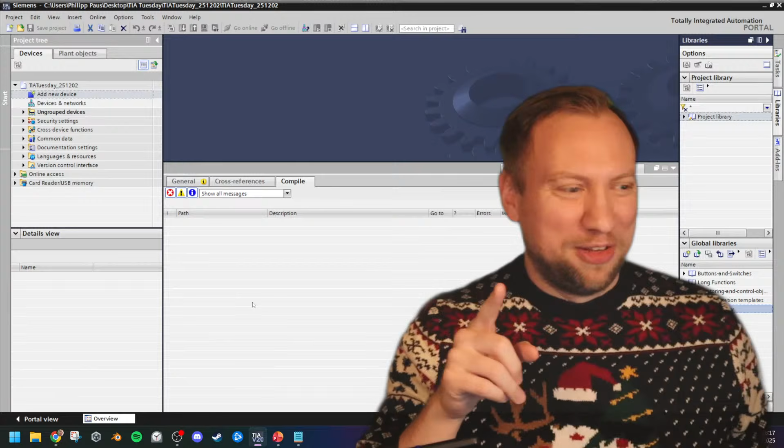Okay, let's create today's project, and I also want to get into something I completely forgot. Last week I created the library TIA Tuesday that I want to publish, and I have not published it anywhere yet. What I will do today is, whatever we create here in our project, I am going to push into the same library, and I'm going to publish this library somewhere. I will make a post and let you know where that is. I have not forgotten, I have just not done it.

So questions there, Mr. Goodman: am I planning to talk about OT cybersecurity or OT IT integration? Cybersecurity, I'm not too good with the topic. It is an important topic, and it's very important that you don't make any errors there, so I don't feel too comfortable talking about it too much. I will put it on the list here in the communication: IT, OT, security. Definitely important, but I'm not an expert in everything. No one can be.

Anthony has a question there. Hey, Ateko, hi. Hey, Kamal, hi. YouTube channel helped a lot with learning. Yes, that's why I have the YouTube channel. Happy to read it every time.

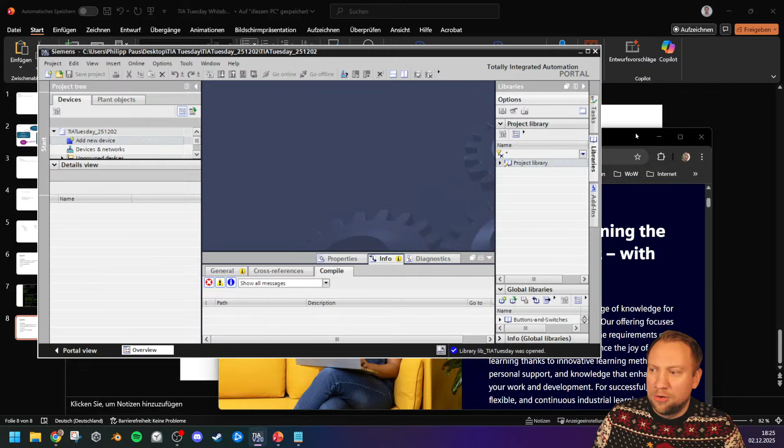Servio, maybe I'm late to the party. What about Factory IO? You've seen me use it, yes. The reason I'm not going to use it today is because I have not gotten a license. I will in the future, but right now I don't need one. So the trial license has gone out the window. Will that work for simulating drives? No. Factory IO does not have drives integration. It's just like a 3D mechatronic system. It's not technical components, it pretends to be, on a very superficial level.

Which tool do you use to restore an SMC card? I'd say TIA Portal, but if it's gone, it's gone, pretty much. Have I ever used IBA? Nope. I have drunk a lot of IPA in the past, India Pale Ale. But IBA, I have not used that. I don't know what it is. Sorry.

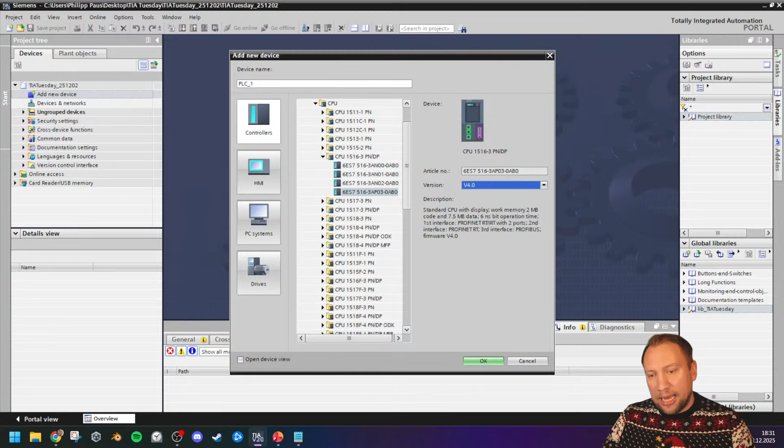So, right, I now chose a TIA controller here, a controller that is firmware version 4.0. Now, in the past, the user control and the access control to PLCs has changed quite a bit. And of course, I have not really talked about the newest version, except for me complaining that there is a new version and that the new version sucks and I hate it. Now I want to take like 5 minutes to talk about it.

I will not look at different YouTube channels right now, but maybe I'll put it on my list. My T-shirt is like my Christmas sweater, my ugly Christmas sweater.

Yeah, so this one here. Firmware version 4.0 is the newest firmware version as far as I'm concerned. Maybe 4.1 or so, but that's the most recent one, and I will call this PLC drive. It's version 4.0. Now, when we nowadays set up a PLC project, there will be this pop-up. This pop-up is nothing new, but what we get in this pop-up is new. And it talks a lot about the user management and the access level to TIA Portal.

Yeah, but Arteco, you're right. If you are running a successful firmware version, try to upgrade it if you know what you're doing. If you don't know what you're doing, don't upgrade it. Never change the running system. Unfortunately, firmware upgrades have to do with safety. And industrial data and your systems should be protected as much as possible. So a firmware update is sometimes crucial, as unfortunate as it is.

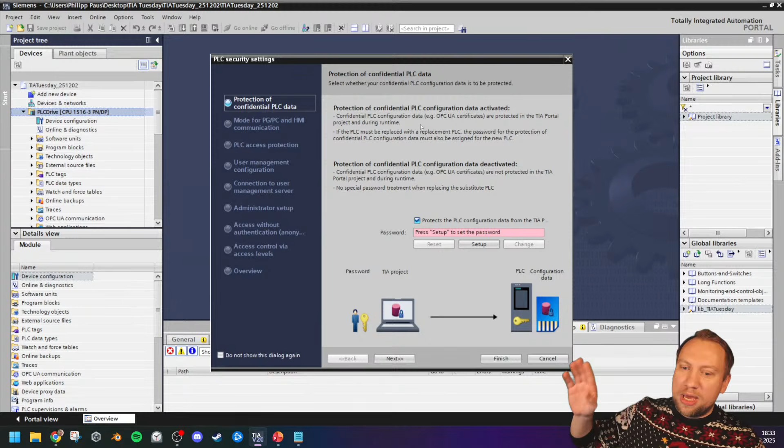Okay, most of this is not too important here. I will turn off the PLC protection. We still, however, have to have this. This is the new thing. You can disable access control, but this, of course, lowers safety and so on. This is not what we want to do. We want to enable access control. And this is the new user management that we have.

This new user management is different from what we had. In the past, everyone could program your PLC except for the ones that you set specifically in the PLC hardware and device configuration. So you had to create the PLC user in the device configuration. That has changed. Now the users will be saved inside of the PLC. However, they have to be set up globally inside of the project. They can be in the project itself, or they can be on a server and be synchronized with the server, which I will not set up now. But we have this stuff here.

Yes, the firmware update will change signatures. Unfortunately, yes. Rebuilding is not great, but sometimes it is necessary. And Jason is right. Not talking too much about firmware now, but of course, if you have a running system, don't change it.

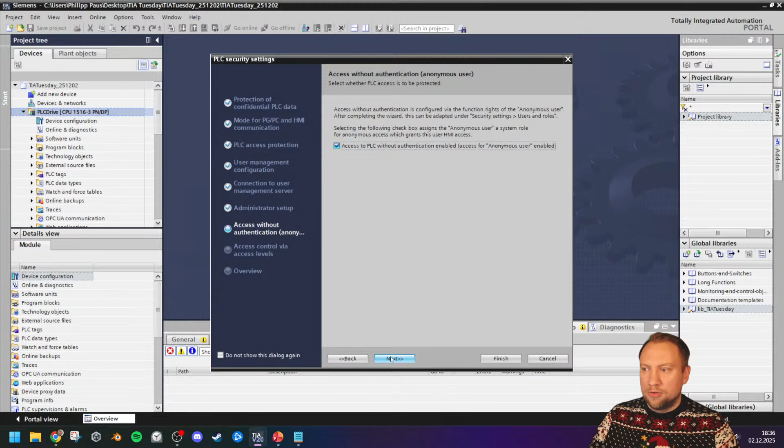It's kind of stupid, but you have to go through this process here. And you see now, I cannot change the access level here. There's nothing I can change because the access level is now fixed on a global scale.

We have told it, hey, yes, the anonymous user is allowed to do stuff, but that's it. Right? If we don't do this here, we have to create a user. There we go. That's just the new process. There is now still one thing that won't work, and we will see this in a second here.

If I now try to compile my program, that should probably be without. No, that is already with the problem. Yes. You see, if I compile my program now, my PLC, it will give me an error. Whoops, I cannot download. I clicked the wrong button. But while this is loading, I can now read questions and so on.

Hey Ben, hey go. Would you ever consider doing code reviews? I don't really do code reviews. Sorry. It would be maybe on TIA Tuesday. Maybe I can do live code reviews. Oh, that would be something interesting. But I also am not confident enough that I should do it currently. Yeah. For students, for beginners' projects, yes, but for real industrial projects, could be quite difficult. There's still the drives and firmware discussion there. Hey, Artux, hi. How are you doing?

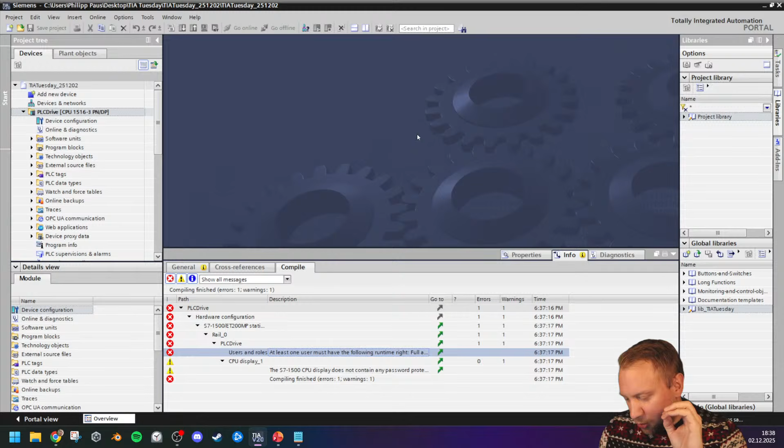Performance differences between languages. CRC error. There's a good question, so I will interrupt what I'm doing here for a second. So I put a pause on this, that we have a compile error now. Right? CRC error asks if there's performance differences between languages. Generally no, but generally yes, depending on what you want to achieve. If you have a function block diagram or ladder diagram and you basically create the same program, they have the same performance. That's it, right? Those are designed to do the same thing.

Now, if you use S7 Graph, that has a different purpose. So you cannot compare two things that have different purposes. You can create the same behavior in the end, but of course, if you have a sequential program, Graph will always be more fitting, more performant than whatever other language you create the thing in, right? Because it has this purpose. Yeah, timing and space. Of course, that's what I mean. That is what performance is in the end. So you want to choose the correct language for the correct job.

Now, the only languages that have the same purpose nowadays are ladder diagram and function block diagram. And those have the same performance. The other two languages that you want to look at are SCL. SCL is this coding language, which is a different thing than function block diagram and ladder diagram. So for more complex algorithms, that's what you choose. And then you have Graph, which is also a different thing, for sequential things. Theoretically, you also have STL, statement list, but that is out of the standard. When it comes to performance nowadays, it's the worst, STL.

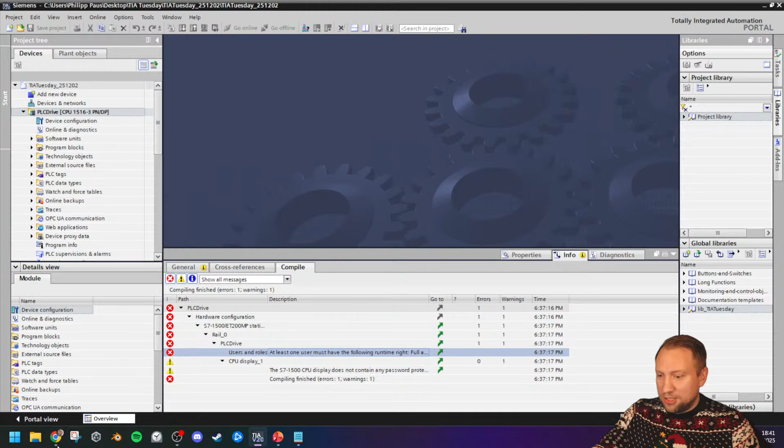There we go. Enough. STL is dead. Yes. Assembly language is literally slower, Jason. Yes. STL is dead. 1 second. What's the programming standard? I always mix it up.

No. What's the PLC programming standard? I forgot the number. How could I? 61131. Yeah, this one. Sorry, I had to Google it on the side.

So the official programming standard, the international one for PLCs, states the programming languages, and structured text is still in there, right? Here, instruction list is a low-level assembly, like STL. Instruction list is this low-level thing, but that is out of the standard. If we use this, right, look at this instruction list. This is my favorite language that is on Wikipedia. Right? STL, instruction list. AWL, that's STL in German, is no longer included, is no longer part of any standard.

STL is dead, right? You are using it on older hardware, you don't use it on newer hardware. STL and pointers are dead. Tant Costco, that's exactly what I'm talking about. We don't use those anymore. It's not me saying it, it's the standard. I just say what the standard says.

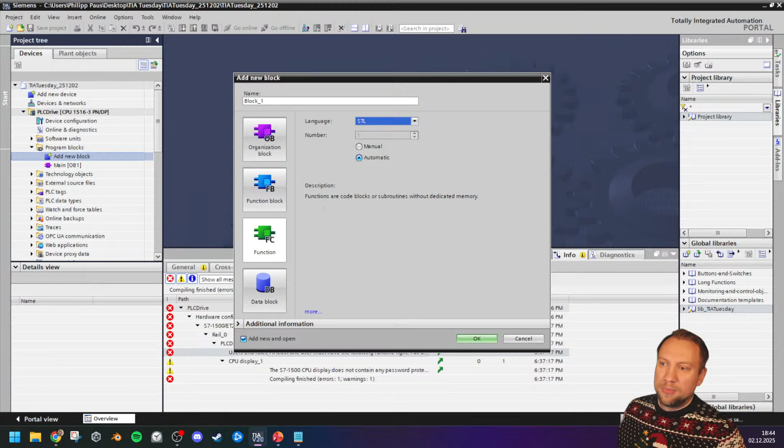If you create STL code in your Siemens PLC here, right? If you create a block and you make it STL, this block will be the least efficient block that you could write. Literally, because the hardware does not have the necessary registers anymore. It literally is the worst. S7 1500s. 1200s can't speak it at all. 300s, it's still the best.

Cancelled. Rakesh, that's the problem with me. Yeah, there we go. So users, right? I have created the PLC, and now when I compile, it actually does not allow me to compile anything because no one has full access, right? So I have to create a user here that has full access. I just double click on this, and this is now the settings for the complete project. So if I have 10 different PLCs, they all use the same user here.

And the anonymous user, or any user that I could create now, has to have the PLC administrator active. Right? This user role, the PLC administrator role, has to be activated for at least one user, which is here in the security settings in the users and roles. That's where I am currently. So this is a setting that when you're using a version 4.0 and newer PLC, this has to be active.

Usually you would, of course, create a new user, local user, give that user a password, and this would be your PLC administrator. And then your PLC would be password protected, right? But I will have no password protection, anonymous. Everyone can override my program. Artico, your first PLC stop in production was due to a loop in STL. Yes, one reason why we don't do it.

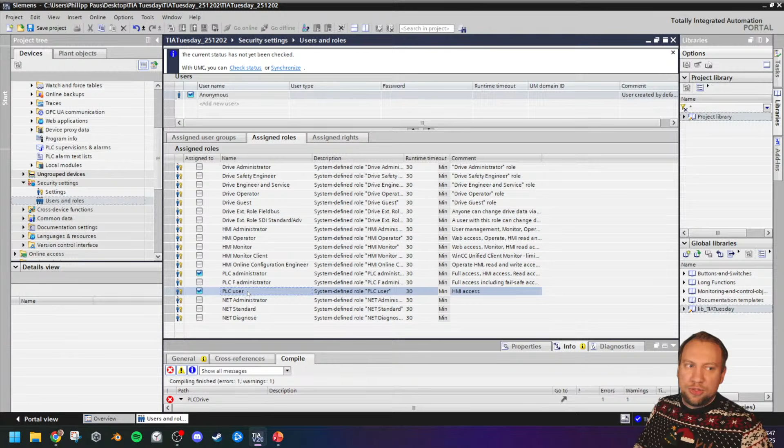That sounds like a lot of work, but that is how TIA does it now, right? So in the future, you will always have to go through that, users and roles, and then the anonymous or any other user has to have the access rights here. And this is the least access rights that you need for PLC programming. Yeah. I could now actually also deactivate the PLC user because the PLC user is included in the PLC administrator, but I will not. There we go. And now if I compile, everything's fine again.

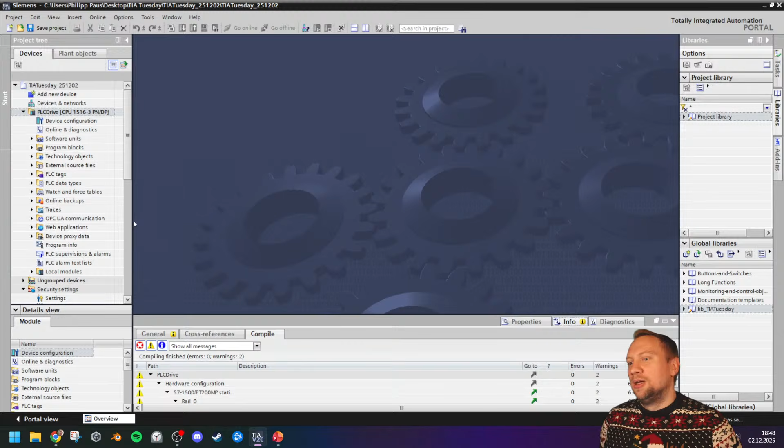Now, we do have our PLC, and I want to simulate it very quick. Right, simulation. I turn my simulation on there. I will disable. No, this is the standard stuff. We've had this. There we go. So I do not have the PLCSIM Advanced license anymore, so I have to use the PLCSIM Soft Bus, which is okay right now because I'm not communicating to any other devices. In the future, I do have to get the Advanced license, though.

Yeah. And now I can download. And now every time that I download to this PLC simulation, the anonymous user can be used and will be used. Right? We have set this up. The anonymous user can access the PLC without any password access. That's what we have set up.

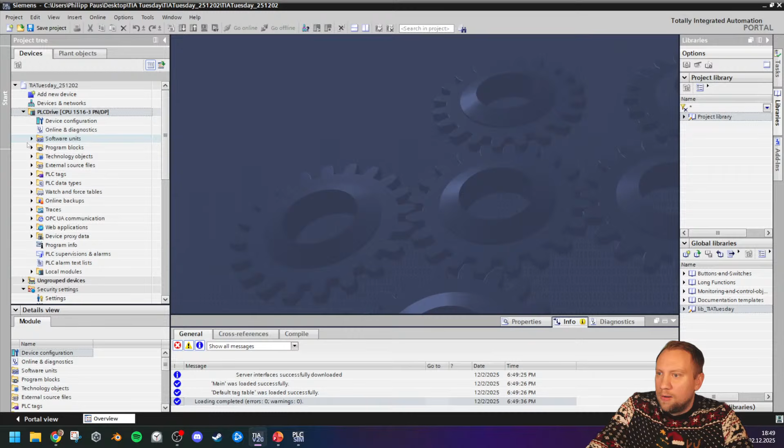That's too much caps. Is SODT timer retentive? Abhishek asks if the SODT timer is retentive or not. You can turn on the timer to be retentive or not. Very quick, just to answer Abhishek's question. By default, they are not retentive. Oh, the SODT. Is that the old one? Oh, the SODT, I have no idea. Don't use it. That's in the legacy branch there. Those are hardware timers. I think they are not retentive because hardware timers, they cannot go into the...

I could be wrong on this, but if I look at my PLC, at my assignment list here, you see you have inputs, outputs, you have bit memory. This bit memory has one big area that is retentive and one big area that is not retentive. And then you have the timers and counters right on there. I want to say I don't think they can be retentive. They can be retentive. Here, look at this. If you click here, retain data, you can say how many timers starting at timer 0 should be retentive.

So your manager is old. The SODT stuff is S5 timers, S5 counters. That's very old stuff. You can still use it, but it's hardware stuff. Now, I don't want to get back into efficiency when it comes to programming. The Siemens PLC, the S7-1500 especially, has hardware for this, which is kind of stupid, but that's what it is. There we go. But you can make them retentive.

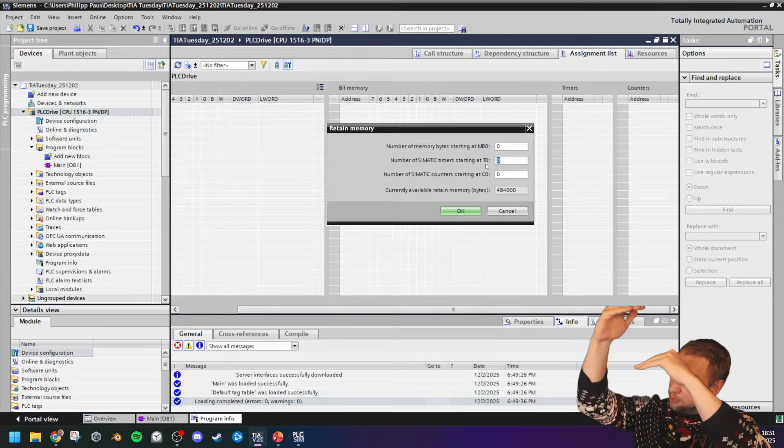But this will always start at timer 0, right? So if you only want timer 5 to be retentive, that is not possible. You can only have timer 0, 1, 2, 3, 4, 5 retentive. No gaps in between, right? It always starts at T0.

Hey Dora, hey. Those things are older than me. S5. Come on, S5 is S5. It's got to be older than me. 1 second. Siemens S5, Step 5, is older than me. I think so. Ha! It's older than me, yes.

The retain settings are the stop-start thing. So, yeah, it will retain the state after stopping and starting. What is the first S? It didn't exist. Siemens made Step 3, Step 5, and Step 7. Don't ask me why. I read into it and I forgot about it. It is S3, S5, S7, yeah.

Okay, so good. Now, user management done. Let's get into drives a little bit. We're still good on time, right? I've not been stalling. I'm not an expert in drives. That's what we will find out very soon. But what I want to do is in my program here, my PLC itself. Hey, Rodrigo. Hi. You're welcome.

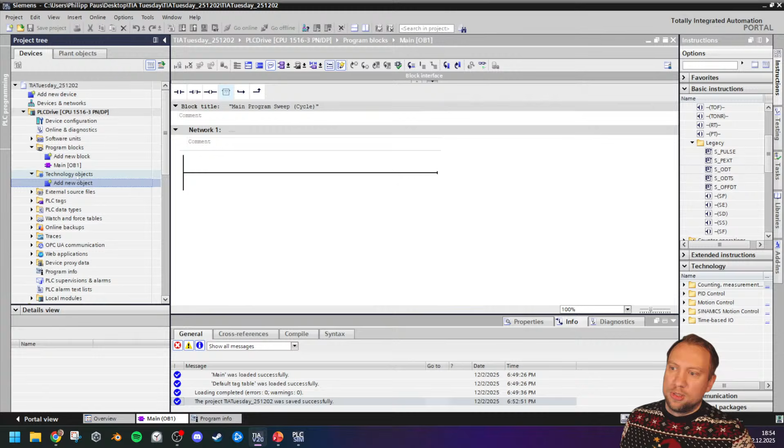So you will have to integrate more consistent timing things, which will happen automatically. So what we want to integrate is a so-called technology object here. Now, drives. And you will see a better picture soon that TIA has integrated. But basically, the perspective that I have is I live inside of my magical bubble. That is the PLC.

Now, my magical bubble, the PLC here, will control a huge mechatronic system. I'm kind of the manager. And there are many, many subsystems inside of a mechatronics system. Now, one of those subsystems is, for example, a conveyor belt or a lift system, whatever we have. Anything that needs to be driven. This system of course has inputs and outputs to our PLC, so there is some communication.

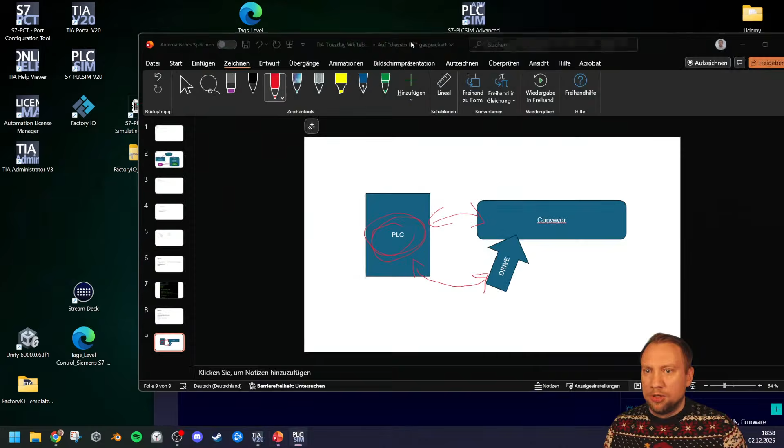Version control and documentation features. I mean, that's a pretty base level feature, but I will put it on my document here, which I've closed. Why would I ever close my document? One second. Yeah, so that's the thing. So we will concentrate on the PLC side of things here. Just one second, I want to have my document open so I can take notes. For whatever reason, I have closed it. TIA Tuesday. I'm one of those people that if I don't need a folder, if I don't need a tab, I usually close it. Yeah, there we go. Video communication. RS485. I will probably not touch RS485 for now.

Good, okay. So what I need to do though is this outside component, this drive, is very complex. Very, very complex. Those drives can have hundreds, sometimes reaching into the 1,000 different parameters. They have a crazy amount of variables, a crazy amount of intelligence going on in themselves. And I don't need to touch this.

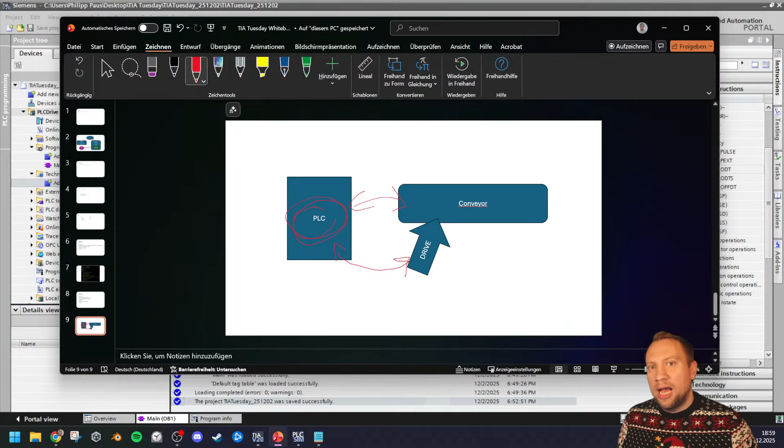From my perspective, from the PLC, what I will do now is create a technology object. Now, a technology object: there's different types, and I've already talked about technology objects a little bit. I will now use the one that I'm most familiar with, a speed axis here. Now, a speed axis.

You see, the speed axis technology object maps a physical drive in the controller. I can issue commands for default speed with a drive with PLCopen motion control instructions. Now, PLCopen is a standard that is not Siemens. So I could, with this, connect and control an external drive that is not just Siemens, but any other device.

Of course, if you stay in the Siemens world, it's much nicer, but yeah. Now, one thing that I have already said is that the drive itself, the communication to it, is very time critical. And you will see the use of technology objects affects the temporal behavior of other CPU execution levels, including the F program. This is extremely critical.

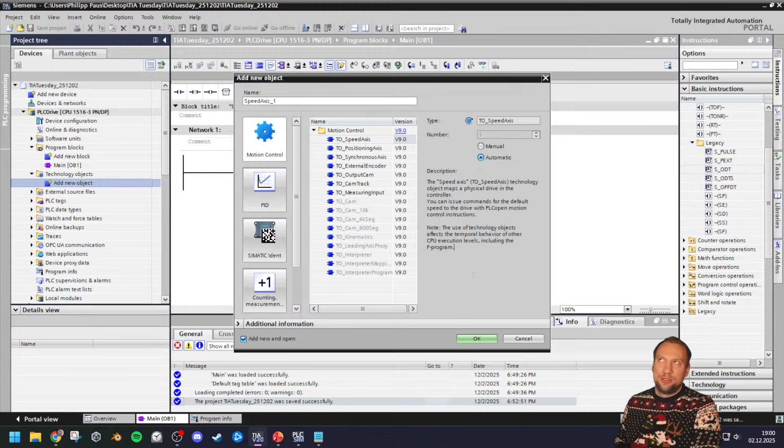The drive itself, we will not have a complete drive inside of our PLC. We have assisting things to control it, but we will not replace the whole drive itself. That will be very critical. It already is going to slow down our PLC tremendously. Right? So if I add the speed axis here, I will not give it a nice name. That is a nice name, and I'll hit OK.

What you will see is that the PLC is going to create subroutines automatically. You have a motion control interpolator and a motion control servo. Now those, right? I can't go in there. They are know-how protected, but they are for all of the things that the controller needs in order to communicate with the drive. Right? Many things are in there.

And now, can I still go online? I want to do one thing. Yeah, I can. I have not talked about interrupt priority. I probably did, but let me actually get in there. Portal features. Interrupt priorities. This, of course, leads into that topic. Yes, 100%. So right now, Speed Axis 1. Yes, I will not rename that.

That's fine. You see right now, my PLC program takes approximately nothing, right? Every millisecond, the program just runs. That's the green number that we see there. The green number is how fast is our PLC. And therefore I will need to make one click here. Now, if I download my PLC, I think that it will now have a temporal, I'm not sure. I've actually never checked this out, but it should have an effect on our cycle time already.

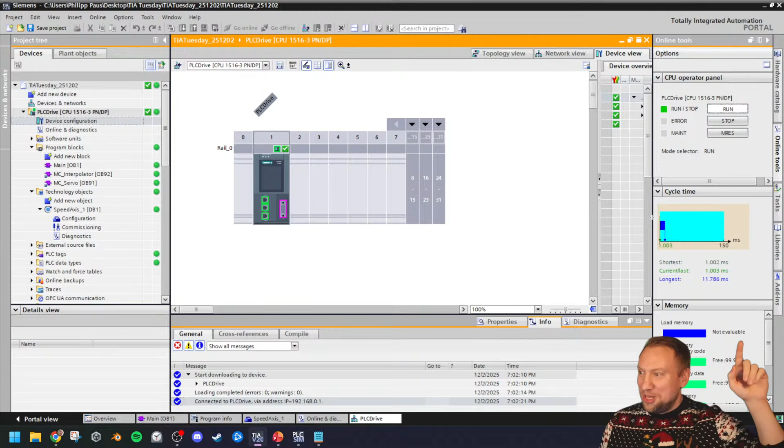So if I go online, maybe not. Nah, we can't really see it. We can't really see it, but if it would be a little bit more complex, we could already have an impact on the cycle time. I mean, we can see it a little bit. It's 0.003 milliseconds more, 0.001 milliseconds, but it is longer.

It is. Right? Will I make a video about ASI bus? I have it on my list. ASI is definitely on the list.

There we go. So this is now for our motion controller. Now, one thing that I want to do already is I like to visualize things, right? And I want to have you visualize right now a conveyor belt. So you are running a conveyor belt, and on the conveyor belt you have boxes. You have stuff that is very, very critical, that is not allowed to break.

Right? After 4 years, hey Kumar, hi. I've been back for, I think this is TIA Tuesday number 6. I think it's 1.5 months now.

Yeah. So what I want you to imagine is that. So what I will do now, and I've done that a couple of times by now, is I will take my speed axis and I will trace some parameters that I want to trace right now. So I will go here into my traces. I will add a new trace. This is very fantastic what we can do with the speed axis here.

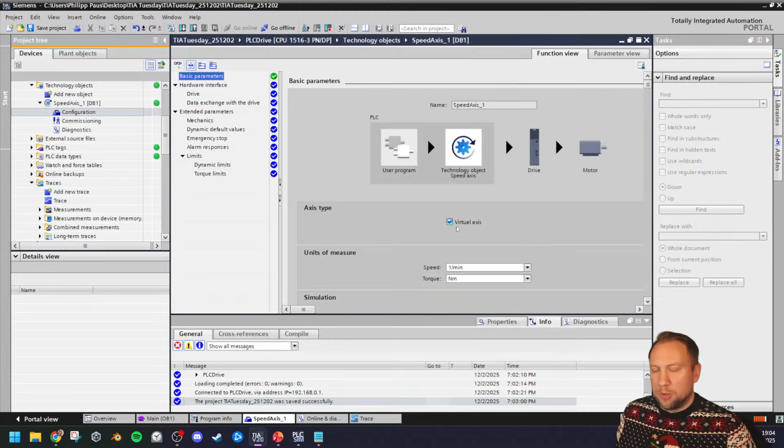And by the way, for my speed axis, I have changed one parameter that is called virtual axis. Now, this virtual axis parameter is important right now for what we're doing. It tells me that there is no physical drive that we want to control right now. You see, if I don't have that, I will need a physical drive, but right now I don't want to. So the PLC itself is going to make a lot of decisions here.

So in my trace, I can select my speed axis, and you see when I select my speed axis, only one click, on the bottom here in the details view, we actually have a lot of parameters that I want to talk about. Of course, let's talk about the velocity. Let's talk about the acceleration of our conveyor belt, and let's talk about the velocity and the actual speed.

No, the set point. The set point I want as well. And then I want to reorganize this a little bit. Here we go. Now, I will re-download everything because this needs to be in the controller.

Oh, I didn't need to write the thing here. That doesn't matter. Now, what I will also... This is new for me. Record events of technology objects. This function allows you to record a motion controller. This is interesting, but I've never seen that, so I will not touch it right now.

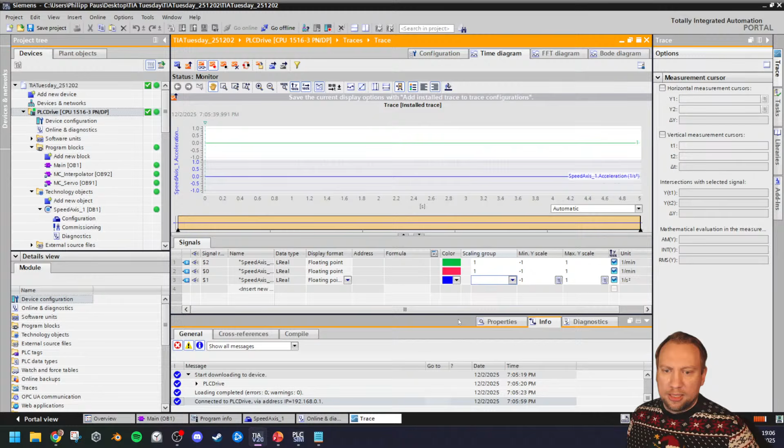This is exactly what I've done the last weeks as well. I do love traces. Tracing is fantastic. So right now, everything is 0. Everything there is 0. That's perfectly fine. And what I want to do is the following. I will have to split the editor window for this, so we still have the trace here. On the other side, I want to have... Yeah, I was wondering. It must be a version 20 thing.

I've never seen that. What I want to do is go into the commissioning of my speed axis. Now, normally in your PLC program, you just have an output for a motor that turns it on or off. Right now, what our PLC has control over through the technology object here on the right side is a lot of drive parameters. Things that we can tell the drive, hey, please do many things. And actually there is a lot of things going on.

I won't go too much in detail, but the first thing here is I activated the master control. This will be connected to a G120. So Nova asks, what about G120? This is what you connect to the G120. I'll get to that in a second. The master control here. There's usually 4 different areas that can have the master control. The drive itself: if the drive has the master control, you can use the operator panel on the drive.

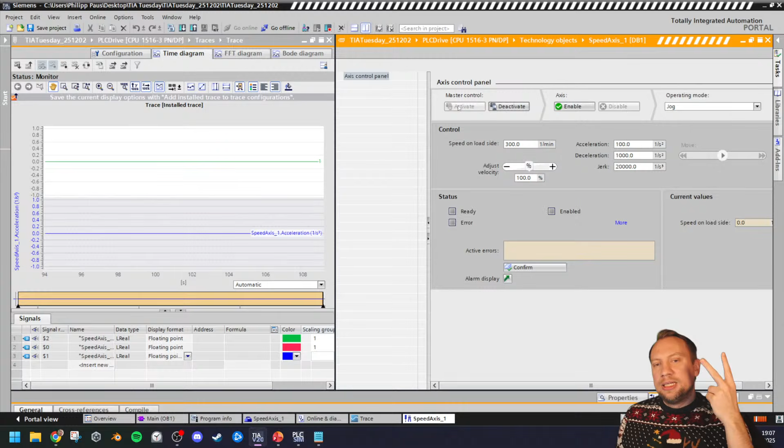The second is your PLC program can have the master control. The third is you can have the master control through any kind of interface. And the fourth is the commissioning window here. So I have activated master control right now in the commissioning window, meaning I am the boss right now. I can control, not the drive, but the technology object, which will connect to the drive.

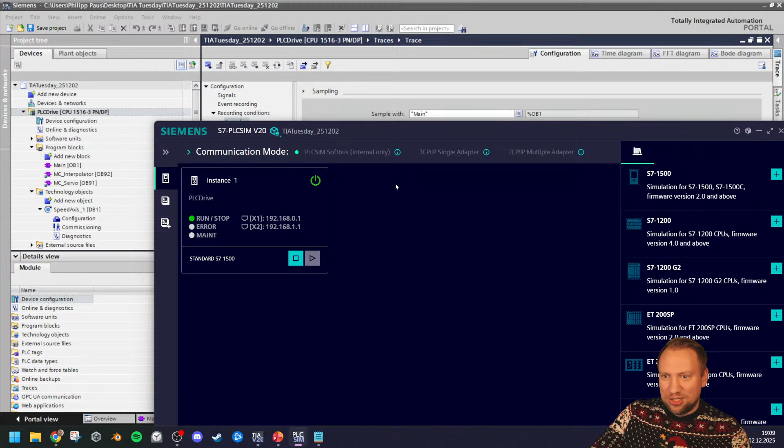The second thing is we have axis. If I click on enable here, there is an internal error. What? That is new. Exactly why? I have tested this, and I'm pretty sure it should work. Master control. Yes. Enable all axes. Interesting. Oh, screw you. That's new. Just 1 second. I have tested it with PLC Sim, yes. I have tested all of this, so it definitely works. I don't know why it does not right now.

So this, by the way, is just safety because the drive is very dangerous. Internal, I do love it. So this happens to me as well. Internal error. Like, what is the error? Please, TIA Portal, let me know what the error is. It doesn't. So what do we do if it doesn't give you the error? There is a commissioning tool, Nova. I will get into it in a second. This is an internal error, and I literally don't know what it is. So I will have to restart my PLC Sim and TIA Portal.

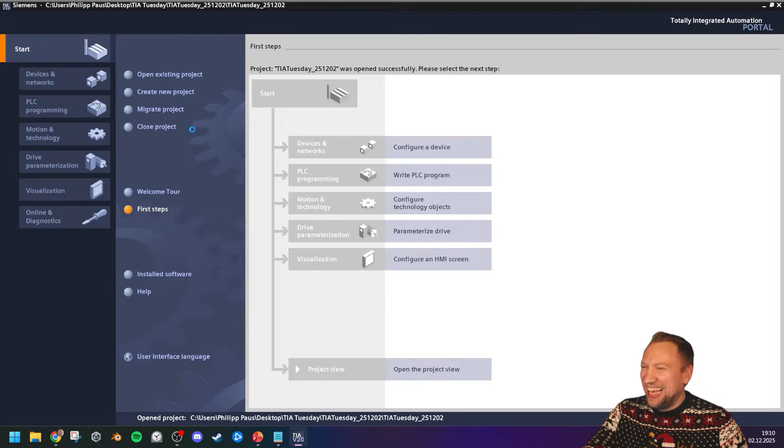Which should take only a second. Should work now, hopefully. No, I don't need to set up anything. I'm very sure. I will simulate this. Yes, we'll disable other interfaces. Usually it says restart the PLC or so. The main problem is that I'm doing simulation stuff, so it might have to do with the simulation, and it might also have to do with the user settings. But I have tested this early on, so it shouldn't.

Just give it a second. Could always be, right? That's also something we can learn here. Never freak out. Stuff like this happens sometimes randomly. It shouldn't, but can always be the case. So let me go into my TO, into my speed axis here, into my commissioning, and I should hopefully be able to start this now. If not, then this is going to break everything, and it's pretty bad because I can't continue from this point.

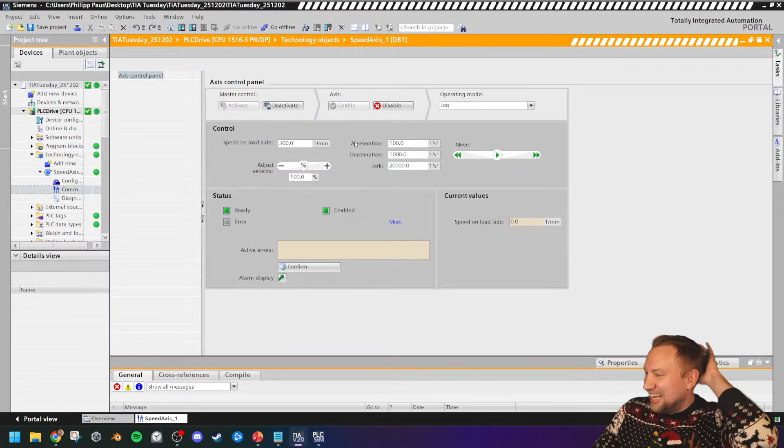Activate? Yes. This tells my PLC I will be the master of these controls. And now the enable. I could enable. Okay. I don't know why. I had to restart. Could be. Yeah, never freak out. Of course, in industry, you're always under time pressure, but try not to freak out. So this is okay. And now I want to go back to my trace as well.

Now, the problem is if I open the trace, this might press emergency stop if I'm not fast enough. Ah, it did. Master control is returned due to violation of monitoring time. Right? Once we close this window here, that tells the PLC, danger, the one that is having control over your drive system right now isn't there. So that's why closing this window or having another tab over it is dangerous. Now this works. I should have just had that as a parallel tab there anyway.

And now, I don't know why everything is scaled funky now. Why is that the case? Okay, almost there. Scaling group 1, scaling group 1. Yes, please go in the same scaling group. And this is monitoring. And now I can enable my axis here. And now I can control the motor, right? Motor on, motor off, drive on, drive off. Like this would be the speed, right?

Huh? Oh yeah, that's my set point. The real velocity right now is following 100% because the acceleration is extremely fast. No. That doesn't matter. It's okay. But we have a lot of parameters that we can use to change the machine's behavior here. Let's actually slow down the acceleration and deceleration a little bit. And that should now make it so that we can get a nice ramp, right?

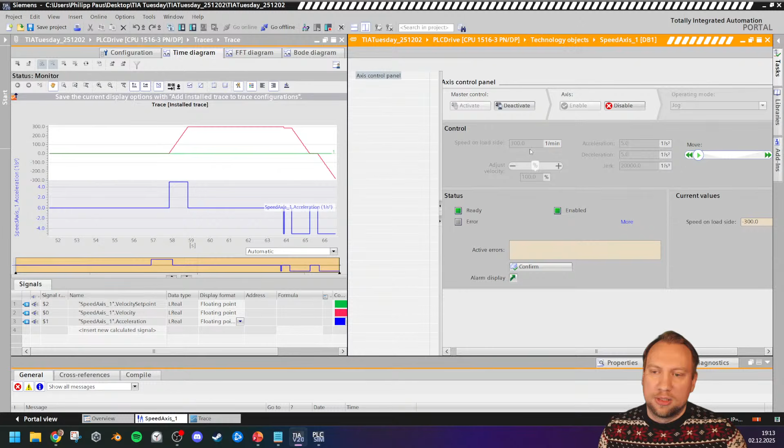The red behavior is now what the motor will give us, or what the conveyor will be. It will not just be on or off. We can, of course, control the acceleration and deceleration there. And if I have it very fast, it's just like a one-step thing. So we have those base parameters. Now, hidden in those base parameters are already hundreds of things from my perspective. This is magic, right? Now, the red lines, those would usually be created inside of the drive itself. But we're taking this job right now. The PLC, the technology object, takes this job.

Let me just see there. No, Emil, thank you for the hint with the TO version of 4.0. It should all work. I made it work just by turning it off and on. Yeah, there we go.

Now there's more parameters. Let's have a nicer curve by also changing the jerk here. If you don't know what the jerk is, neither do I. Of course I do, but we will now have this much nicer curve behavior. This is what you want to have your motor be doing, right? And now we went from this on-off in your motor that we had. If I go back to the base parameters here, which was something like this, this is just on-off. Very bad. Oh, also this.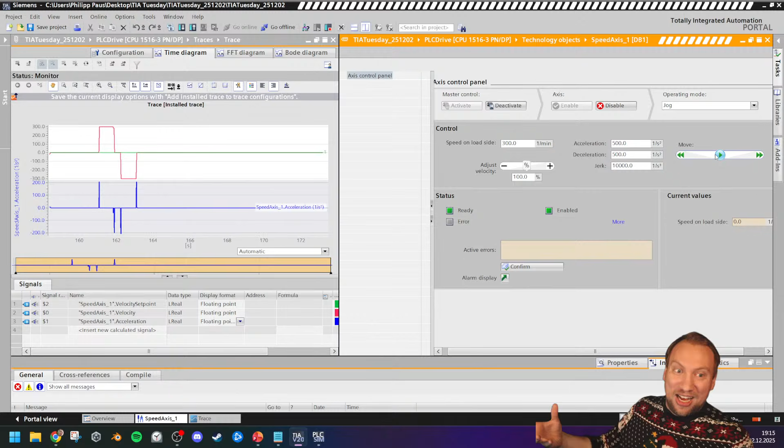On, off. The red thing, on, off. Imagine this is on your conveyor belt, something very sensitive is sitting on top of it, and now this is just on. This is bad. This is you in the car. Imagine if your car just has an on-off. This is how cars used to be, right? They had just on-off. Pretty bad. Now we can change this, of course, to be much nicer behavior by just changing some parameters here. I'll change all of them to 5. That should be fine.

Yeah. I know, yes, jerk is exactly the third derivative. I always say it way simpler actually, not as mathematical. If I have an infinite jerk, or if the jerk is 0, if I deactivate the jerk, you see the acceleration here is just on or off. It's Boolean. Either you accelerate full or no acceleration. If you change the jerk a little bit, the acceleration itself, and that's the third derivative there, is going up and down. It's not instant, it's not binary anymore, which makes the thing much more complex. That's why I wanted to have the acceleration there. So it's the third derivative. In German, the jerk is the Ruck.

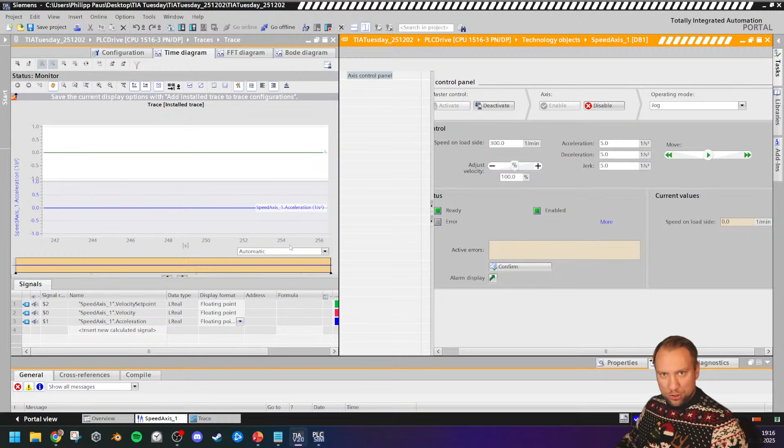Ruck is jerk, like in your car. If you just go full speed, all of a sudden you're pressed in the chair, and that's the jerk, right? Like if you start too fast or too slow, that would be here your jerk. And if I set it to 0, I think 0 is fine as well, that will deactivate it. Yeah, that's pretty bad. That's not what we want. I mean, it is still okay because the acceleration and deceleration is limited, but the jerk is making this much nicer.

Now the thing is, this of course takes place right now inside of the PLC. Usually this is already part of the drive, right? This calculation that we're doing, the red line there, is part of our drive train. That is already in there, and we have already improved. Now the thing is, there is more to this. This is nice, this is pretty cool. But how do we actually get this to a motor?

Now, what I could do, and now I will go back here, go offline, and I will close the speed axis control here for now. What we do have is our speed axis here, this technology object.

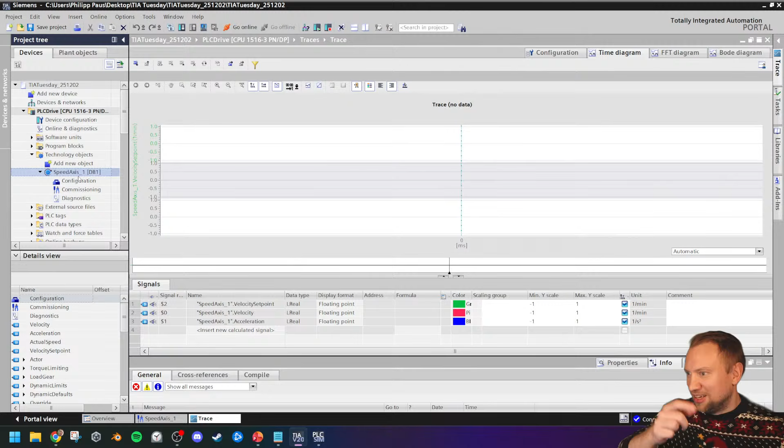Very good question from Riff: what's the pros and cons when you control the drive using Telegram and technology object? Let's get into the technology object. The technology object itself has more configuration that we can do. Now this configuration will configure our technology object here. If I go in here, this is the last thing I want to talk about.

We do have dynamic values, which is not too important, but we have dynamic limits. What's the maximum speed of your controller? What's the maximum acceleration? So how steep should those curves be that I just talked about? What should be the jerk? The smoothing time, which I, for example, set to 5, which will make it so that the curve smooths out. Doesn't matter.

What's the ramp up, ramp down time? So going from 0 speed to maximum speed. How fast will your analog output in this case, how fast will your motor accelerate and decelerate? There's so many things going on. And of course, we would now basically set all of this here.

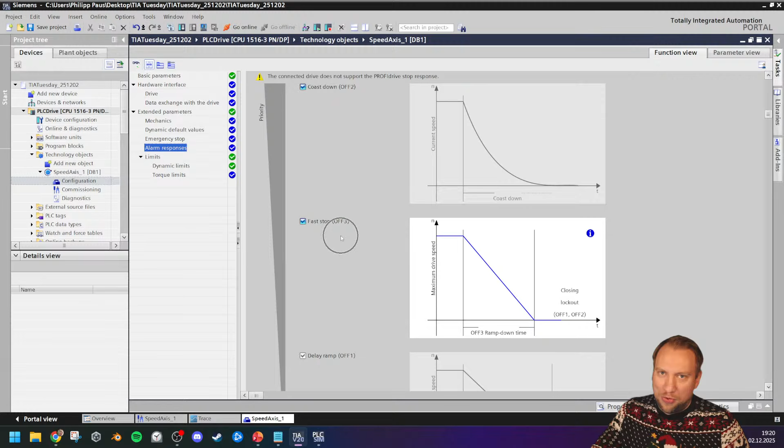And one more thing that was in question early on, and this was, hey, what is off 1? What is off 2? What is off 3? Now we can also tell our PLC, our system in this case, hey, what is your turning off behavior? There are basically 3 different things that we can do: an off 1, an off 2, and an off 3. Those 3 are simply 3 different turning off behaviors. And I always mix them up.

One of them is faster, one of them is with a curve, and one of them is a bit slower, because we have 3 different applications. One of those is an emergency off, where you need to stop as fast as possible. One of those is your standard off. The coast down is your standard, where you want to ramp down slowly. Then you have your fast stop, your emergency thing, where you ramp down very fast. This could also sometimes be instantly.

The problem with this is, of course, it is hard on your hardware. Imagine stopping a car or stopping a drive instantly. You shouldn't always do that. And then you have a delay ramp, which just slows this down a little bit more in specific cases. So you do have different off behaviors for different cases.

Yeah. And Jason is answering more questions there. Perfect. Hey, Logical Controls, you're so late today, sorry. And today I will try to just go for 40 more minutes. And there's so much more that we could discuss here, but you can already see Jason's jumping in there with the expert talk.

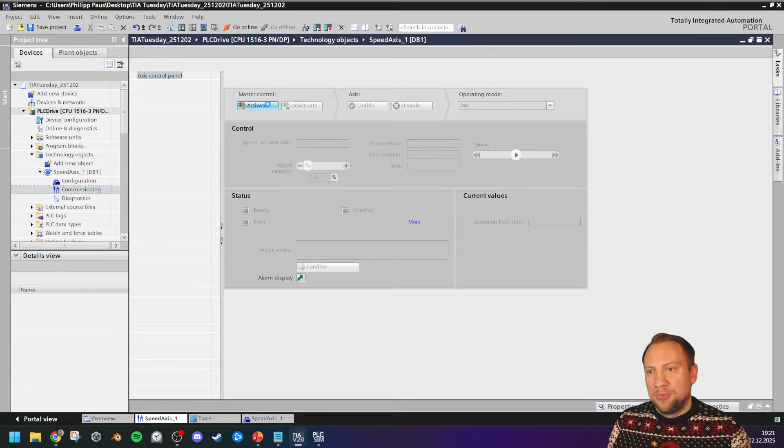Ah, there we go. Look at this. Off 1 is the standard. Sorry, yes, off 1 is the standard. Off 2 is the standard plus STO, whatever that is. As I said, I'm not an expert in this. And the fast stop here is emergency stop, or also if I do this: right now I have this on and I click enable, and this would be running now, and I switch the window to anything else. This also performs a fast stop. Safe torque off. Oh, nice. STO is safe torque off.

That's such a great... thank you. I've always been wondering. Safe torque off makes so much sense. Thank you very much. Yes.

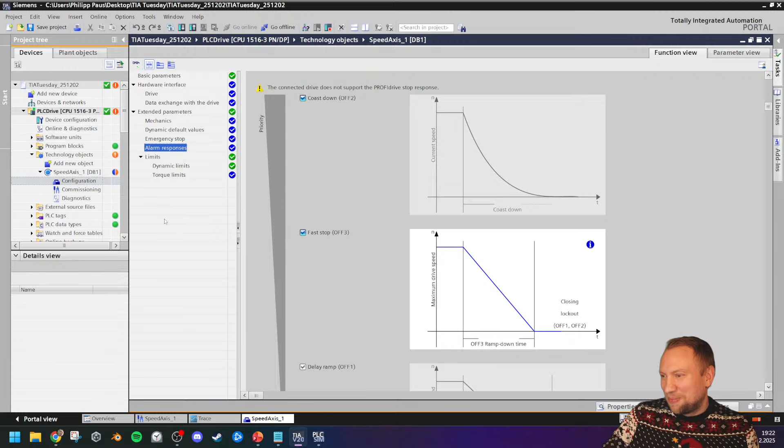Now, the safe torque off, I always knew, of course, what it does. The safe torque off is basically saying, hey, just stop it right now. Stop it. Don't care about any safety there. Oh, it just turns off the power there. Okay, different. It just turns off the power, and the motor is slowly stopping. Then that makes sense. Fantastic.

Now, all of those things, and this is my perspective. Now we're entering the area of the drives perspective. That's why it's perfect having Jason and all of you experts in the drive section here. Now, my perspective on all of this is, I would just program this, and this is now where we enter those extended parameters. This is for me actually not too important. It is kind of, but not too important.

Now, what's important for me, of course, is how do I get this to my drive? Because right now I do have my PLC, and of course, I do have my motor, which is connected to the conveyor belt, and in between we have the drive. Does not have to be a Siemens drive.

And let me answer this question there, Pruna. If your motor has a brake, is STO applied to the brake also? As far as I understand it, no. It's just austrudeln. In German, the word is austrudeln. Sorry, I'm German, I know the German stuff. Austrudeln would mean it's just slowly... you don't accelerate, you don't decelerate. Just austrudeln.

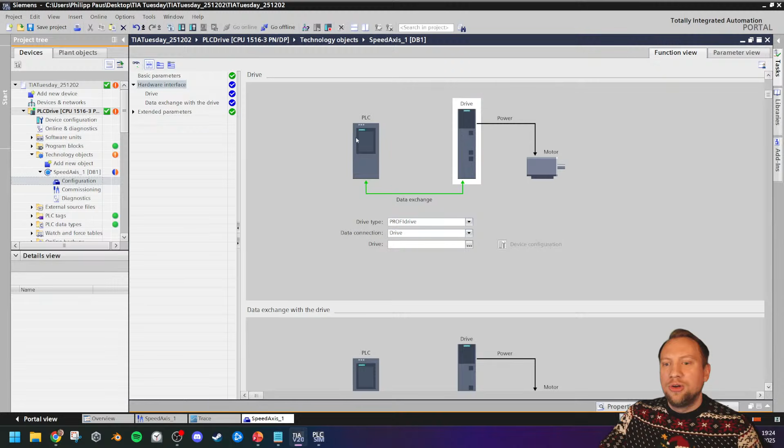A PROFIdrive exchange works on a level where we talk about telegrams, which I will get into in a second here. I do not have a drive, though, in my project, so I don't have a telegram. Jason explains the stuff there perfectly. I don't know what those parameters are. I just control them with my PLC program. Coast stop. See, I learned things. Austrudeln.

So, what we can configure is a so-called telegram. A telegram will generate a lot of inputs and outputs that we want to control: digital inputs, digital outputs, analog inputs, analog outputs. There is a lot in those. If I go to my device configuration here, I will have to configure this drive telegram inside the drive. And you see there's different ones. Most of those are not Siemens specific. Some of them are. For now, I will leave this at no telegram because I don't have a drive.

Let's add a drive, though, to our project. Very quick. As I said, I don't want to go over time. I'm not an expert in this. You see in the chat way more expertise than I have.

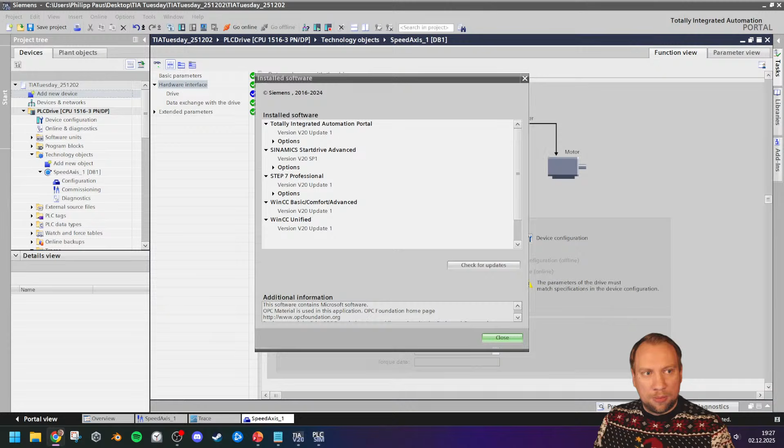Now I am using Startdrive, which, if you Google Startdrive download, you will directly get to the download page within Siemens. And it would be this one there. You just download it, you install it, and you've got this now in TIA, which will allow you to implement drives.

And Jason there says, anything below Telegram 100 is standard telegrams, and everything above is Siemens specific. In this case, right? Startdrive is free, but DCC is not. I don't make the rules.

So let's see. Now, I have installed Startdrive, so I will add a new device, I will add a new drive, and I will add a G120, for example, G120C or G120, I always mix those up. I haven't tested this. Doesn't matter. I will add a G120, this one. It doesn't matter too much right now. Let's see how this can be controlled with CAN bus.

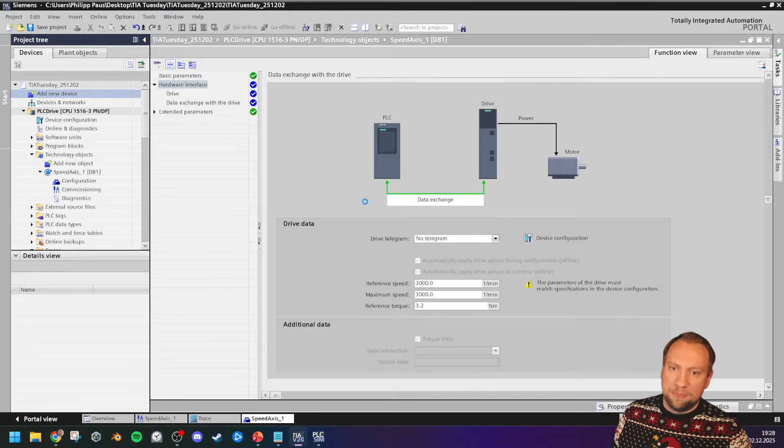Let me actually add this because I'm more familiar with this. You see, there's different sizes, different categories. I will just take this one. I don't have hardware anyway that I can really show, but I will add the hardware here to my project. And I will get to one or two more smaller topics there. The Startdrive program should always work, yes.

Now this device here is our control unit for the drive. Those things usually have three different parts, which is your control unit. So it has an intelligence in itself, so it can work on its own. We are now giving it the curve from the PLC, and the speed set point, everything is calculated from the PLC. But theoretically, this thing can work on its own. It's its own smart little controller thingy.

And you see it is SINAMICS, which is not my automation department. My automation department is SIMATIC, and not SINAMICS. Siemens Dynamics. This is not my department there.

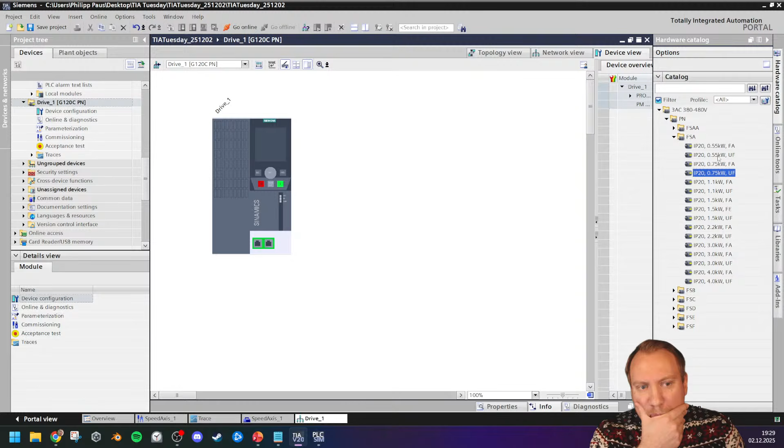Now, what I still need to do is tell this how big the motor is that you have there. What is your so-called... Oh, this is already in there? Fascinating. Okay, the Leistungsteil, the power unit, is already in there. That's what I chose there, I just realized. Interesting. Nevertheless, this is my drive now. This is connected to the motor. This is driving the thing.

Now, what we need to set up is the communication between this and our controller. So the nice curve that we just saw a minute ago, how does it get to the controller? Hopefully I can set this up, one second. Now they will need to communicate, so the drive is supposed to be coordinated with the PLC, so I'm going to assign it here to the PLC. Now the drive is assigned to the PLC, and in the communication here I have to tell the drive what telegram we want to use.

I'm on the drive right now. This is like the communication parameter of the drive. Telegram configuration: the drive here wants to send data to the PLC using standard Telegram 1. And there we see what Jason just said, Telegram 1 and 20 are standard telegrams, and there are Siemens specific ones. We can also create our own one, but let's stay simple with standard Telegram 1.

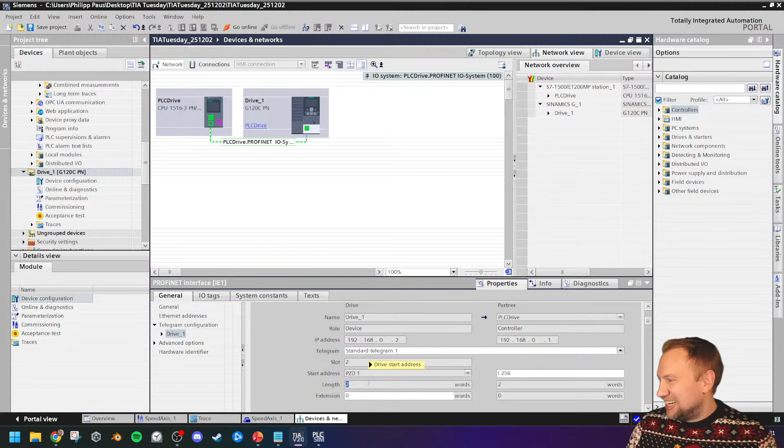Inside of standard Telegram 1, we will find 2 words of, how's it called, PZD? Like 2 control words, so 2 input words and 2 output words as well.

Those drive names, I'm not even sorry for that. The regular G120 has CU. Okay, thank you very much. It doesn't matter for what I'm explaining now, but thank you. That clears things up for me.

So basically, this thing has 2 words of inputs to my PLC, and it also has 2 words of outputs from my PLC. So I can use those 2 words, outputs 256 and inputs 256, in my PLC program. Hey, Tunnel. Good evening.

So what I could theoretically do now is go into my PLC tags inside of my PLC. I will just split my window here for a second. What is this? Oh, that's the drive. Yeah. And I could add a new table.

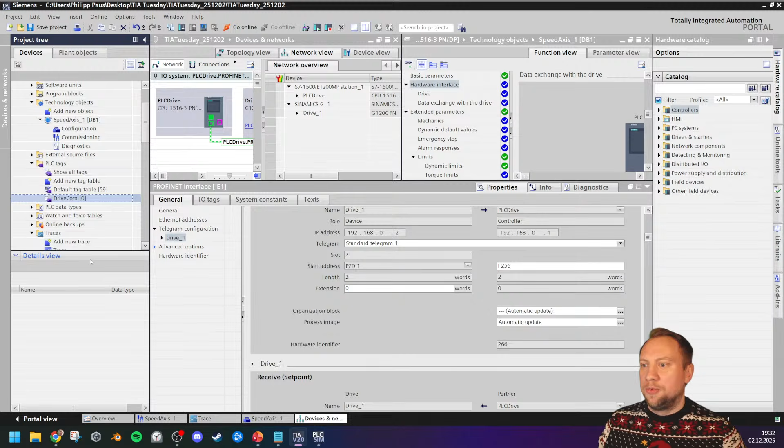I would call this drive com or something. And inside of the drive com, I could set up a couple of variables, right, that I would just take from here, from my Telegram. And yeah, my window, my screen size is what it is. And now I could just set those up, right? Input 256. All right, 256, which is IW

256, sorry, is a word, right? This is my, I don't know how it is called right now. Wait, there is a word for it. Standard Telegram, the PZD. And Jason definitely knows what PZD is. In German, it is Zustandswort. And I don't know what it is in English. Right? Probably something, yes. I will just call it PZD.

Right? The same I would have for the output here, which is then my control word. That also has a name. Now, all of this is irrelevant, right? But this is for me right now. This is also PZD1. Okay. I don't know how those are called. But this is my control. This is my status word. Now those two, they do give me, I do evaluate the status. I put it in there before you said so. Zustandswort. I just know German words, but thank you very much.

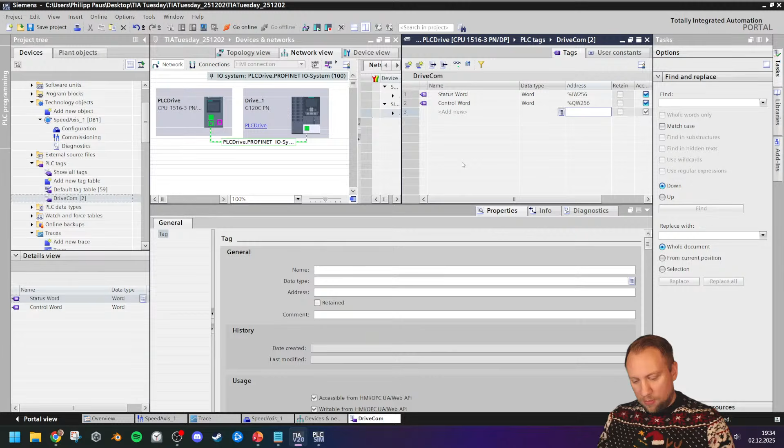Yes. So those would be coming from the controller or to the controller. This is inside of our communication. Now, what we also have in there in the standard, like in the second word, right? The second word of this would be the input word 258, which is our speed, right? The speed feedback, and then we have also output word 258, which is our speed set point.

Right? So we have all of those: speed feedback, current, speed, current. Right? So we have those and we can use them inside of our PLC program as standard inputs, as standard outputs. I can now create this and use this in my PLC. Now, to be even more precise, right now inside of the drive, this status word and the control word and the speed set point and so on, they do exist as variables, and I do hope I can go into the parameterization.

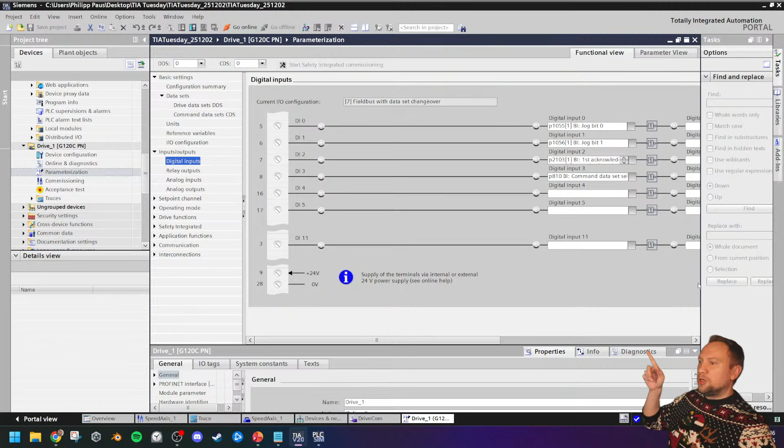Right? And we have the parameter view here. The functional view, I always mix this up. Yeah. Just 1 second, I need to search for the right place. Inputs and outputs, probably this. Yeah, you see this, right? This is what the drive is going to get from us. It has those digital inputs, it has the outputs, and we can control those. Wait, no, those are not the right ones. Those are the physical ones. Where are the...

Can't I get it from here? But you see there's... basically, in the end, what I want to get at, and I don't know where the... Do I have to monitor for this? It might be. Now, in there, right? You see we have many parameters that we want to control and can't control. Right? In communication. There. Ah, thank you very much. Yes, that's what I was searching for. Probably. Yeah, you see we have many things here that we can turn on and off.

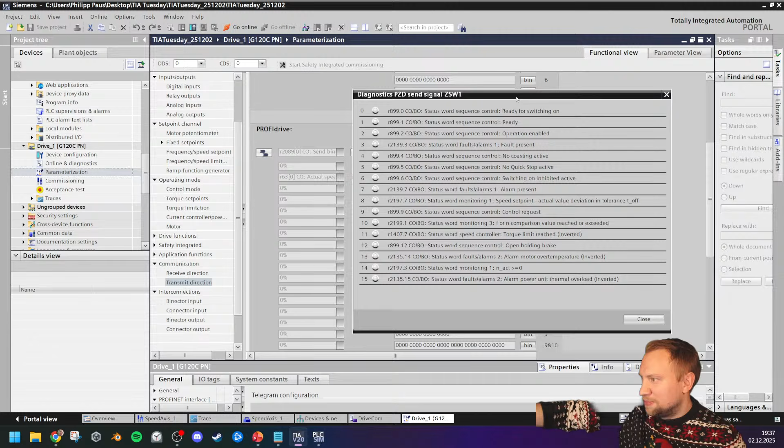Right? Many parameters that we have, like the telegram here, and down here is probably what's within the standard telegram. And you see there is quite a bit of stuff in there. And for me right now, right, if I click on this, you will see we do have a parameter for all of those things. Right, let's see. This is not what I want. The receive direction is what I want.

Now, all of this is not irrelevant, but from the PLC's perspective, those are now the outputs that I can use. I do have a PLC output. If I turn on the bit number 0 in this word that we had, right, I can turn on and off the drive here. Right? If I have this output, and we talked about this a little bit, it's the OFF2, the coast down that Jason explained earlier on, right? Then we also have the bit number 2. If we turn this on, it's literally like a bit that we turn on inside the PLC program, right? That would lead to a quick stop, and so on.

We do have many different outputs that we can use, and we also receive from the drive. This is now PLC program perspective again, right? Inside my PLC program, I can also see I do have an input, a bit that tells me, oh, the drive is ready for switching on. Oh, the drive is ready. Another tag tells me, oh, the operation of the drive is enabled. Oh, there is a fault present, and so on. I can use all of those inside of my PLC program, right? As individual bits, or as a word in total, but we have access to those, right?

And that's what you would literally do. I could write a program that just controls those ins and those outs as any program. Right? Yeah. Let's see.

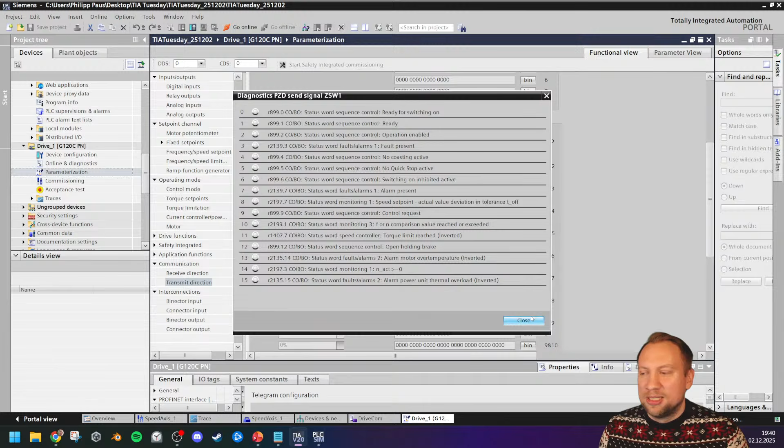So the more complex your application, the more complex your telegram will be. Simple as that. Usually, you would take a standard telegram for a standard application, like the standard one. It's the most easy one. It's the most simple one. You can make your own custom one if you want to. We will not do that. But we could.

Yeah, and this is what I'm leading into. I don't want to advertise Jason now too much because it's still my channel, right? But Jason has a lot of knowledge in that direction, which I saw. So you inspired me to talk about this topic. There we go.

Now, back to my perspective, right? Imagine I am completely overwhelmed by all of this. Pardon my French, holy shit, what is all of this? Whoa. If I go into the parameter view here, this is not okay. This is, for me, from the perspective of a PLC person, of the TIA person right now. What is holy schnitzel? Yes. Tran, you're saying it right. What is all of this?

Oh no. You're not trying to, no. It's okay. We're talking knowledge, Jason. Right? We're talking knowledge, and knowledge should be shared. So I'm very happy that you also share your knowledge. That's my honest opinion. If not, then I wouldn't be saying things.

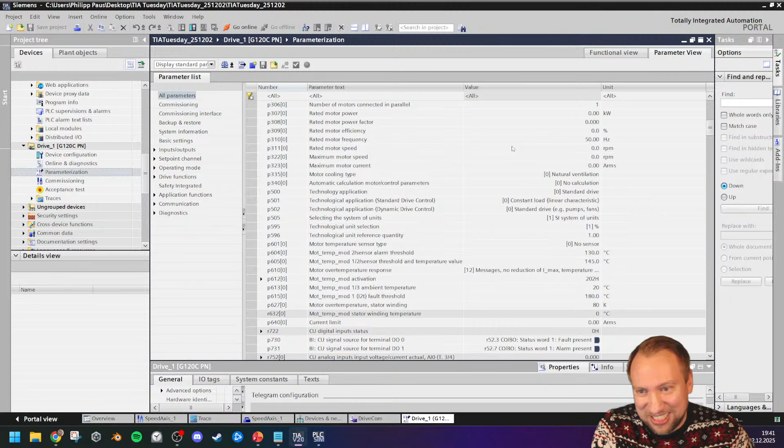But you see, there's tons of things. Whoa. From my perspective as a PLC programmer, right? Holy shit, this is not okay. Those aren't even all of them, exactly. So I know, Bruno, I am aware that this is only standard stuff. Now, from the perspective of the PLC, I couldn't care less about those. And here comes the twist, from the perspective of the PLC, screw this as well. I don't care about this at all. I'm going to delete this.

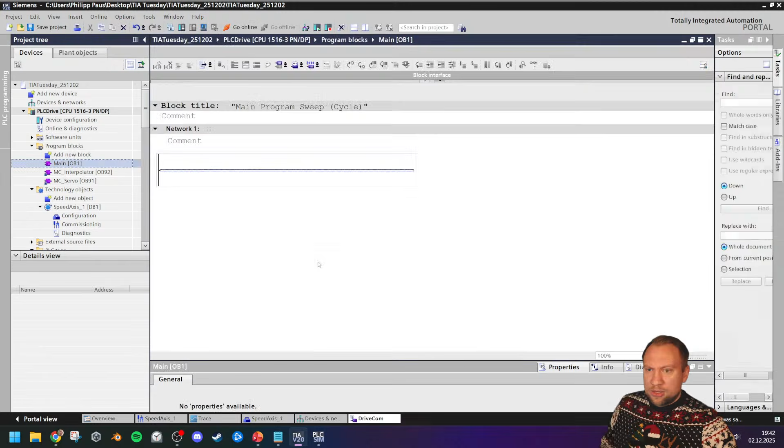What I care about is my program, and what my program does in the PLC. And that's the last part that I will add now. We can't really test anything because I can't simulate the drive really that much. But instead of controlling anything manually, all of those parameters, I don't know what any of this is. What I do know is that I want my system to do what we had earlier on, right? And I will jump back to this now.

What I know, screw all of this. Now, I'm exaggerating, of course, but that is industry. It is complex. I am a PLC control person. So, of course, I want to concentrate on the PLC side of things. Jason can have his side of things, which is this, right? Now, what I care about is basically only this. So I will go online here, download this, turn it on. Turn this on, monitor this, put those again into the same group here.

The only thing I really care about, why all of this is too much, is me doing what I'm doing right now. This is what I want the program to do. The program should be able to take master control. The program should be able to turn on the axis. Oh, by the way, turning on and off this axis here changes like 6 or 7 of those bits that we saw.

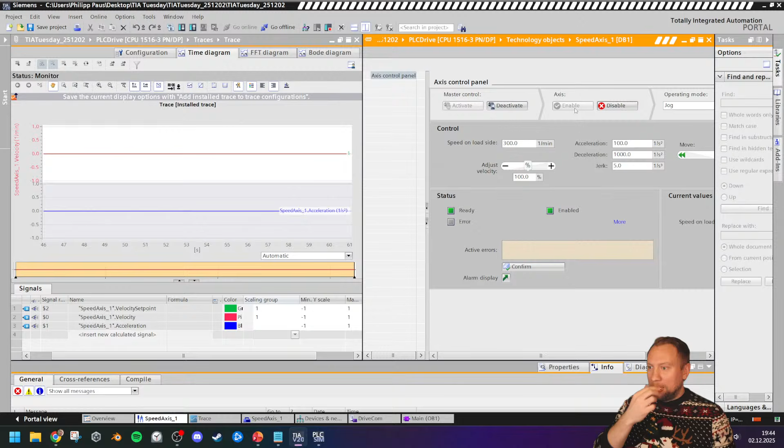There are many interlocks that have to be activated inside of the drive, like in our telegram, that have to be turned on in order for the drive to be active. I don't know how many that is, but there's like 5 or 6 different ones that have to be turned on or off specifically. And I don't know what those are. And I, as a PLC programmer, don't care. The parameter list haunts you like a ghost. Oh no, for me as well. It's crazy, right?

All I care about is turning it on and then this, right? I want to be able to go forward and I want to be able to stop this thing, right? To go to a specific speed set point, for example. Or, if there is an error, I want to be able to confirm that error if there is one. I also want to be able to disable the whole thing here again. Want to enable it again.

I want to be able to turn on jog, or there's different modes, but I want to be able to do plenty of those things. I want to make a quick stop. I want to have a ramping down time. I want to be able to control the acceleration and deceleration here. This is the only stuff that I, from the controller perspective, care about.

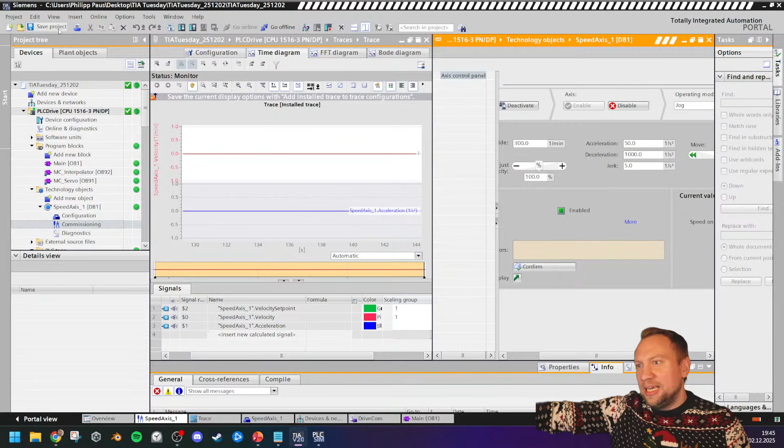Which hopefully you can understand, right? So Jason, you can have your drive stuff. I will stay with my controller stuff, right? So it's like 5 bits, yeah. And then, exactly, there's even a sequence, as Jason says. You have to turn on 5 bits, and then you have to have a rising edge on bit number 0. Do I care? So what we do is we take advantage of what we have. Basically, in my PLC, I want to have this panel integrated into my program as easy as possible.

There's the question from Leon. Can I do that trace thing with watch tables? Yes, of course. The trace thing just monitors your data. Instead of a discrete time view, instead of just right now, it gives you that time. You can have that with any kind of PLC stuff, yes. I also love traces for showing things. So yes, of course I love them.

Okay, now, how would I implement this? Like this table, right? This table here. I'm just going to make a screenshot. How do I implement this easily in my program? Let's see. I do have this here, for example. This part I will call the enable part. Then I do have another part here. Let's say this is the speed set point or so. I will call this the speed part.

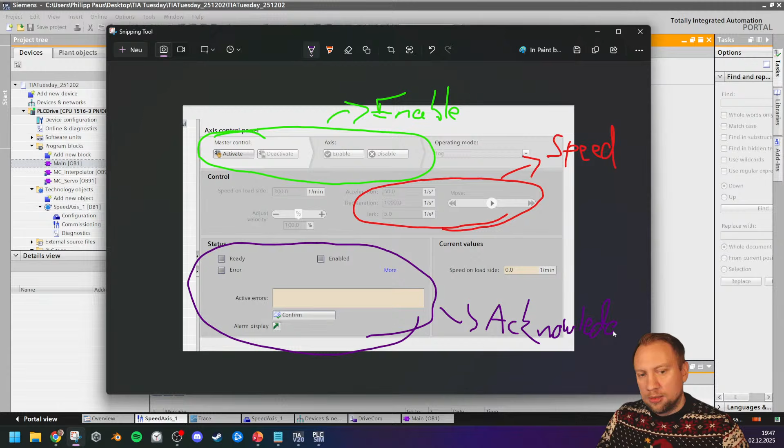I do have down here the acknowledge part, or the reset part. Acknowledge or reset part. This resets the drive, right? So that is what I want. This is what I need. I don't need all of this complex stuff.

Right? Nice jumper. Thank you. Thank you. Right?

This is what I need. Now, I also don't care about the single bits. I just care about those areas. And therefore, and now I have 10 minutes left and I don't even need 10 minutes. We do have our technologies here. There is a motion control technology and there are our motion controller blocks. And it is now so simple.

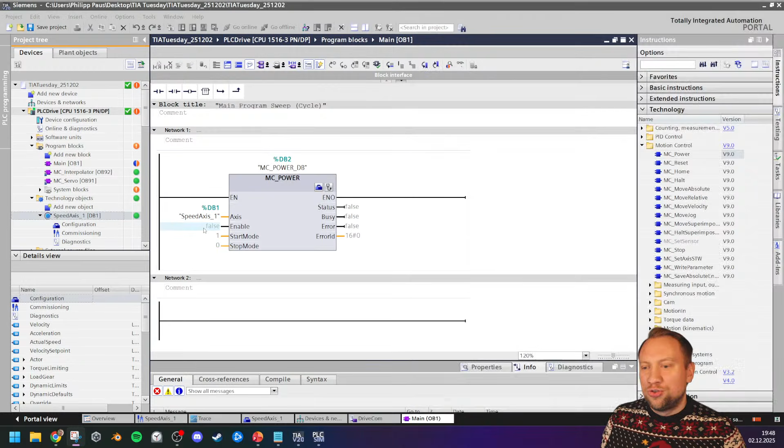I do have a motion controller power block. I just pop that into my program here. I will give this a data block. Yeah, sure, it's a function block, right? This motion controller block now is supposed to, and now drag and drop, control speed axis. And this MC_Power is the same thing as the enable. So if this block sees a true at the enable, and I will give this a new variable, I will call this enable. This is just global memory, right, it can go there.

Now, if this is true, my drive will be turned on. This whole stuff that we do up there. We don't even need to care about the telegram. This will now happen because we have configured the speed technology object here. Now, if I want to reset all of the alarms and everything, make a guess. Oh, there is a reset function.

Is it? Pop that in here, right? Say which axis, this axis. Oh, it has an execute and a restart. The execute, I will put the reset here, right? Reset or acknowledge, doesn't matter. There we go. I will define the tag, global variable here, sure, why not? There we go.

Now, the next area, the speed, I want to go to a certain velocity. Hey, look at this. Who would have guessed, move velocity? Or is it move absolute? I always mix those up. 1 second.

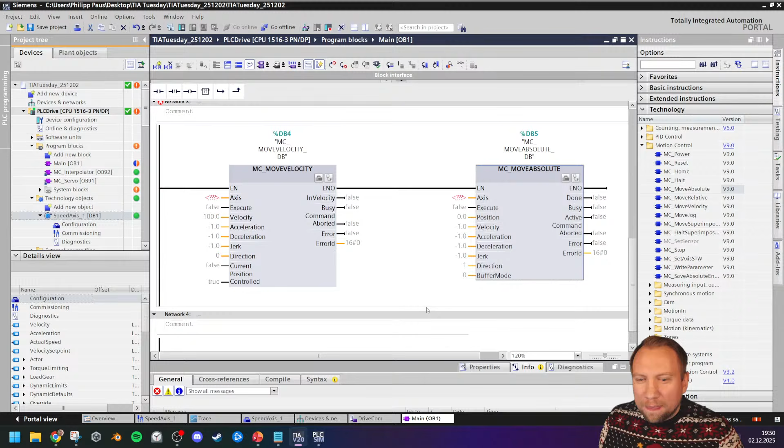No, absolute is position control. Right. So right now, move velocity. Which axis? This axis. When do you want to execute this? Well, when I press the run button or so. Right? When I have the run command, I will define this. Global memory again. If this turns on, axis is supposed to start.

Now, with which velocity? This could be a variable. This could be the velocity, acceleration, deceleration, jerk. All variables, right? All of those things that I have here, those are now my input variables to this block. And also the direction, forward, reverse, is also an input. That's it. I literally just have those PLC variables now that control the whole thing.

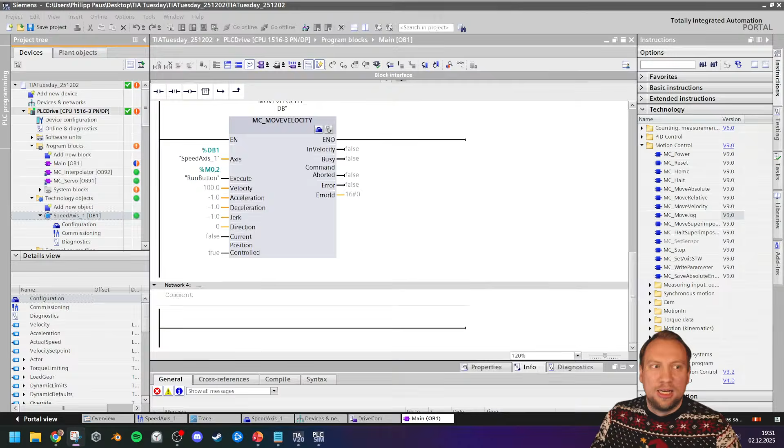That's literally it. I also have a stop, right? The stop will make it so that it goes to 0. Yes, Jason has the jog, and there's more, right? The move jog is basically what I have been doing because the thing was only active as long as I pressed it. If I released it, it went back to 0. That's the jog. I now have the move velocity, which will stay at that velocity. So now if I download my program,

now Ignatius says if you don't tune the driver and so on, of course those won't help, right? This is the base level, not going into drives too much. Logic Controls asks, no, these technology objects, they are also available for the 1200s, yeah. Pretty cool stuff, actually. Very powerful, but pretty cool stuff.

So now if I go back into my, where do I have? I haven't tested this. But I will have my variables now go in here, and maybe I can really control the drive. I haven't tested this, so if it doesn't work, please don't blame me. Or maybe, let's have one more variable. I still have 8 minutes, come on. The variable velocity. At this velocity, global memory, wherever that goes, I don't care about it. And this also goes into my watch table.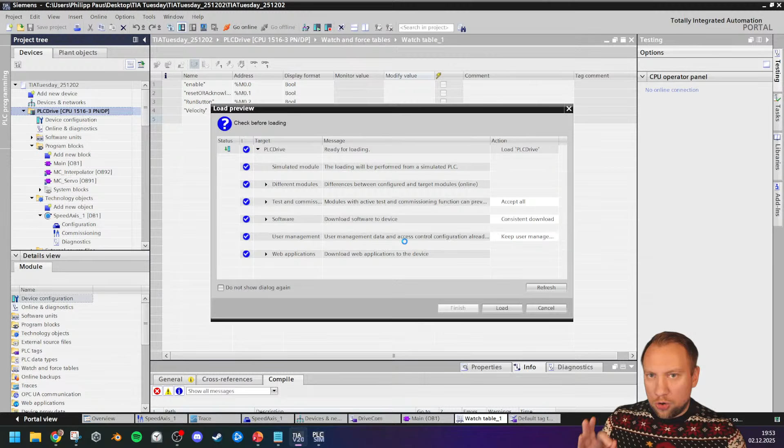Yes. Velocity I can spell. Velocity. So this velocity, I want to give a value, for example, 100, it doesn't matter. There we go. Now if I download my program, we can control this drive. Theoretically, I can really not guarantee that it works right now because I haven't tested this part. Maybe it does. It should actually. We should now be able to control our PLC, our drive.

And this now has to do, right? This will control the telegram, it will give the drive the command, and so on. Like all is in there. This is kind of a pointer, yes. Don't look at that too much. Don't care about memories, but yeah. There we go. And now theoretically, if I turn those things on or off, I should be able to run this thing, which I'm not, as I said, it might be that I'm missing something.

Wait, no, this is not correct. Modify. Huh? Why is it not doing the thing? Modify it. Something is missing. But that is now how we would control the drive. Let me just see what's missing. Why isn't it doing its thing? There might be an error or so. As I said, I haven't tested this part. Let's see. This axis should be enabled. It should be in some mode. It's busy right now. Status is true, which is okay.

The axis... Maybe I still have to reset the whole thing once, which I think I do. So let me reset the whole thing once. Yoink. And now, let me see. Modify to 0, modify to 1. Yeah, there we go. I had to reset this once. And because I have used the move velocity one, even if I turn off the run button, the PLC will stay at that velocity.

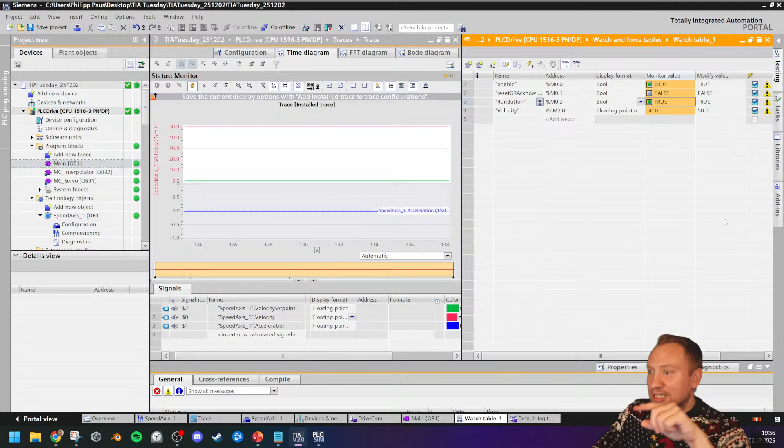Yes, with the motion control jog, you can change without the positive edge. So if I just want to be able to do what I did before, I will not use the move velocity block here, right? Which this will now be renamed into move velocity. If I want to be able to just do the jog, I want to add the move jog into my program here. Which axis, because you could have multiple connected here, this should be my speed axis. And I can have move jog forward, jog backwards. I will call this forward and backward.

Would you really call it backward? I would have called it reverse, but that's just naming. Forward, reverse, and you see I will just create variables all over the place. Of course, we could now also control the jerk and acceleration, deceleration, right? Those are just variables now that we could have on an HMI or wherever. Sure, no problem. It would be very fast, very quick, very easy.

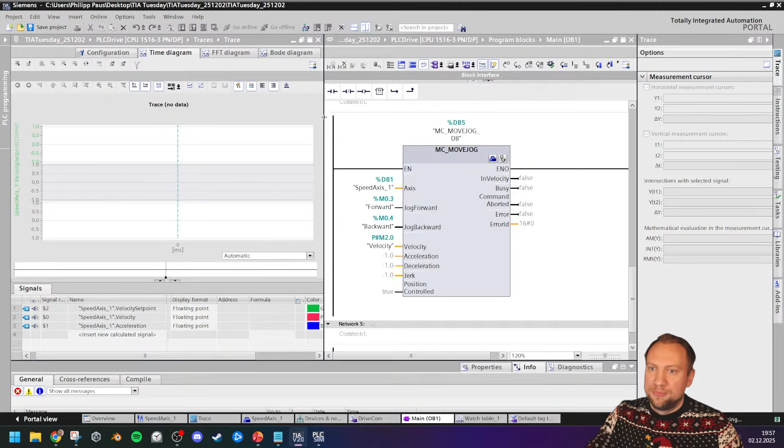Now I want to have those, of course, in my watch table. Those are new, right? Forward, reverse. There we go. Quickly download the program, and now, because Jason mentioned it a couple of times, we can also use the move jog, which will allow us to give those parameters to the drive. Yes. Using the watch table now.

And now we could move velocity. I will turn off. This thing will stay at the velocity because move velocity is, if we turn it on, then it will stay there. That is different to the jog here, which is forward and reverse, or forward and backward. So if I have the backward, you will see it goes through the 0 point. All the calculation of how this S-curve works is inside the controller. I don't care about it. And if I want to go back forward, I'll just hit the true button there.

Fantastic stuff. Stream together with Jason would be awesome. Maybe at some point. Yeah, there we go. Funny stuff. Oh, one thing that I want to add.

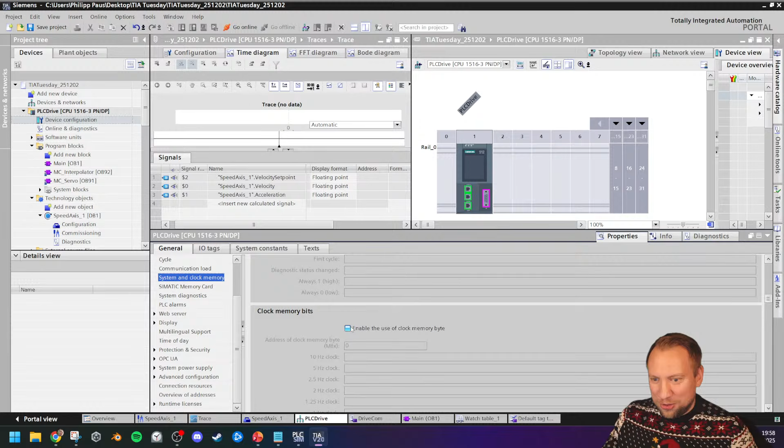Just so we can see things going on, because I will be now phasing out the stream, actually. I want to add one thing to our hardware here. Enable the use of the clock memory byte. Now this will go to byte number 50 or whatever. And I do have now clock frequencies here. And I want to put those clock frequencies to my block here so that we can actually see the curve going.

So let's see. The jog forward should be, and I will now put this not on forward, but on clock 1 hertz in combination with clock 2 hertz. Now this will look stupid, but that's fine. This is going to be fun, because I want to see this moving. If I'm phasing out the stream, we want to see things move. Now this is okay. The trace has gone offline.

In a second, I will be back with chat. Sorry there for a second. Now this is all downloading and monitoring it. There it is. I do not like that I have to every time click on the scaling group again. This is kind of annoying, I gotta say. But it's okay.

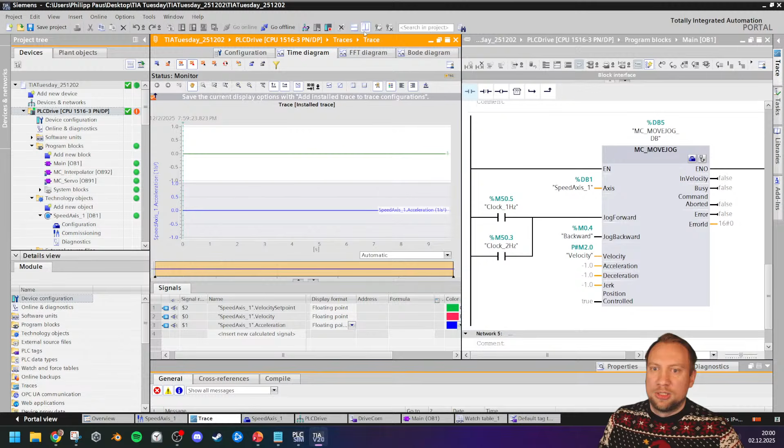Now in the watch table, I can do that stuff. Huh? Did I not download the hardware? Thought I did. I did not download the hardware apparently. And now if I go online. No, I didn't. Wait, I did. Hey, it's not enabled anymore. Why is it not enabled? True. Reset acknowledge. True. And false. Move velocity. And velocity, of course, is wrong as well.

There we go. And now we will have kind of a fancy behavior. Hey, look at this. We actually have oscillations. But we do have this nice motor behavior now, which is much nicer than what we had beforehand. Pretty dope stuff. Now, of course, controllers, especially drives, are much, much more complex.

Let's see. But does TIA Portal do camming and gearing with virtual axes? Yes, it does, but not in this sense. There's many more things. This is just the intro to the technology object and to how to connect the drive. All of this can be done many different ways, but that is one way that we can go. There's way more to it.

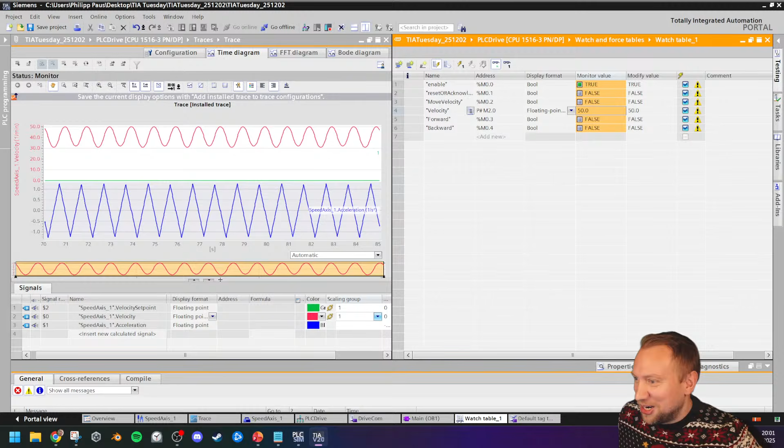Time for OFF3. I will not. I mean, I can turn on and off the OFF parameters now. For example, I can now. No, I can't control this anymore. Shit. Sorry for me cursing. Why did I curse all of a sudden? This is forward as well. So if forward is on, it's going to do that fancy stuff. Forward is off though.

Yeah, now we can control this thing so nicely. This is fun. Let's see.

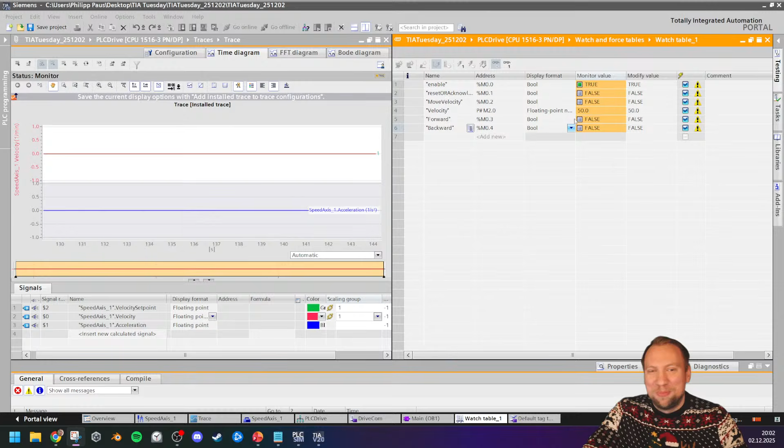So Jason says, if we use the MC power function with the correct parameters, it will drop the off 3. Of course, there's so many more things, and that's what's interesting about this. But my perspective from the controller, right now, this is how I can run the drive now. This is how I can connect things to the drive. This is actually quite easy. You see this? There are different stop modes. You're correct. Not going in details with this now, right?

I don't want to go too long as I usually do, but I think all of this topic is quite interesting. For me, it is. Like, this is cool stuff. And now let me turn on the forward again. Yep. And it's going to be... This is me driving a car, by the way. The set point is 50. Right? And I'm like, I'm going fast, going slow, going slow.

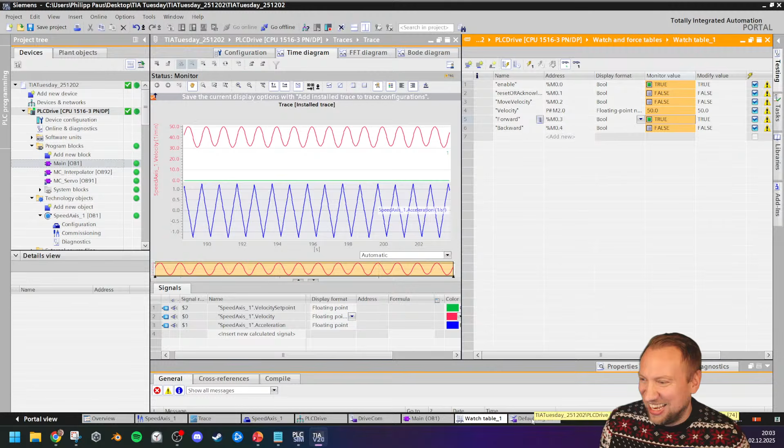Yeah. The help function is really good for those MC, for the technology functions, right? The help function is really good. And there's way more that we could do right now. As I said, like, yeah. In applications where precision is required, of course, this. So Arteco asks, what's with applications where precision is not required? Oh, not required.

There are many different setups, right, that we could have. If I, for example, go into the drive that we have set up, actually, what I'm doing here, this will not right now control the drive as I have set it up. Right? Because right now the drive, if I go into the commissioning of the drive itself, the drive currently, right, depends on your setup. There's many different ones.

Currently, the standard setup for the drive is that the ramp function is generated in the drive itself. What we would like to use now is that the ramp function is generated by the PLC. A very normal setup is though that it is in the drive. It is just one of those examples where the PLC nowadays is taking the job away from other technical components. So that's what we would have in this case. This is there in the 1200 series, yes.

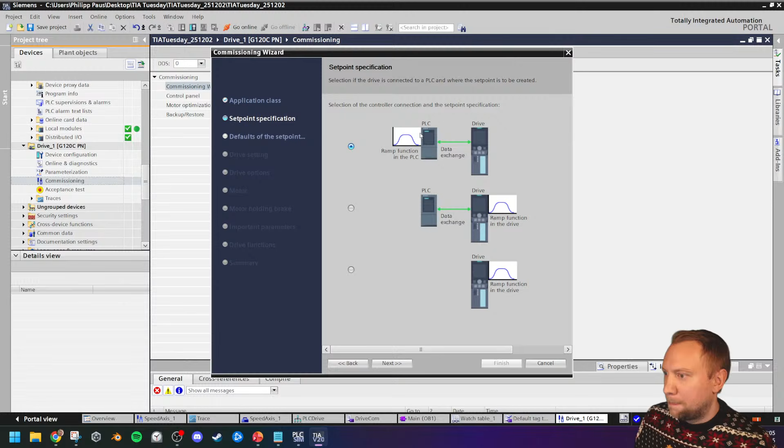Yeah. But as I said, this whole topic is of course complex. We have been in it for like an hour now, so this is fun. This is great stuff, and there's, as I said, way more parameters that we can do. I'm not an expert in drives, so I click on cancel. I will say no. I will not touch those thousands of parameters. Those are crazy magic to me. Like this stuff. I would probably still understand most of it, but not all of it. I'm not an expert in this.

Perfect. This is fun, right? This is cool stuff. This is an intro to drives. This is how deep I, as a PLC programmer, go into drives, pretty much. I don't really need to go deeper. That is where the interface is, right? This was my interface here. I have now set up my user program with the technology objects. I have set up the technology objects with some parameters.

Some other person usually would be responsible for the drive and motor side, which is so much complexity in there. And to be frank, not my personal expertise. And it's fine. I understand parts of it, but you will also not be an expert in everything, most likely, right? So the PLC part, that would be me. That is on me. I will take over this part, and then we have Jason there on the other side, and many more. You've been doing a lot of discussions there. That's great. But that other part, sorry, I messed up your name there, but still, that is on the drives engineer side.

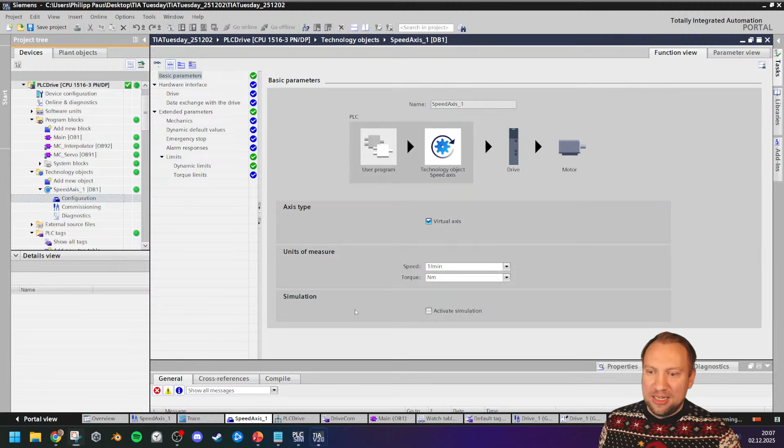What does simulation do? I have not really worked with this activate simulation thing. Activate simulation, virtual axes in simulation. I can open the TIA help viewer, and I could read into this. You can use these functions with analog controls. I could just set the drive exchange here. Oh, right. I said we had the data exchange with Telegram, right? We could also have the data exchange here with an analog, right? And now we would just have an analog card connected to the motor.

Exactly what Jason says, but I was kind of faster. But yeah. There we go. And then the axis in simulation: motion control offers the option to move a real axis in simulation, speed positioning, synchronous axis. Oh, it is if you have a real axis and you want to go with simulation speed as well. Okay, yeah, makes sense.

Let's see. Okay, so that was my part on drives now, right? I'm not an expert. That's the main outcome that we take from this. I'm not a drives expert, and that's fine. I'm not ashamed of it.

Just a bit. Good. I will now make my face bigger to phase out for the day because my girlfriend also just got home. So I want to spend some time with her as well. I'm not going to go too long today.

Yes. Technology objects work with TM cards. Yeah, there we go.

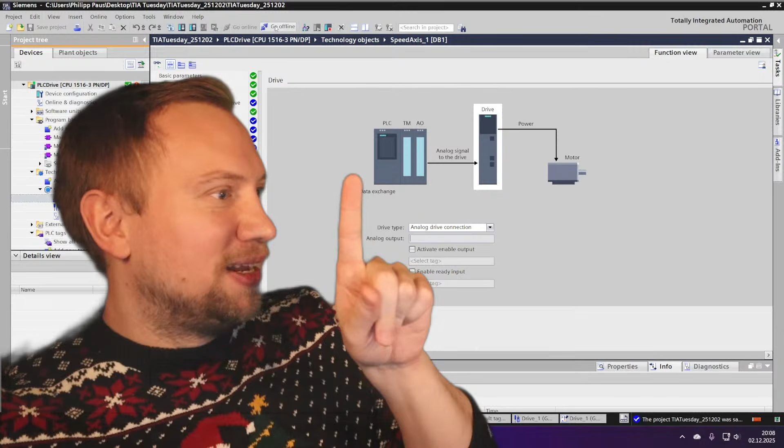Let's see. "It would be nice if I can call the controls guy when I have a problem." There are always jokes going on, right? Like depending on the perspective, you always blame the next level, right? Then the electrical guy will be blamed, the programmer will be blamed, the drives guy will be blamed, the operator will be blamed, the physicist that came up with the physics behind all of this will be blamed. There's this whole chain there, right?

The technology module is for high-speed counters, for example. There's different technology modules, but high-speed counters, yeah, depending on. But usually, if you have high-speed stuff, you will need a TM.

You blame the flux, for example, which would kind of go into the physicist level, I would say.